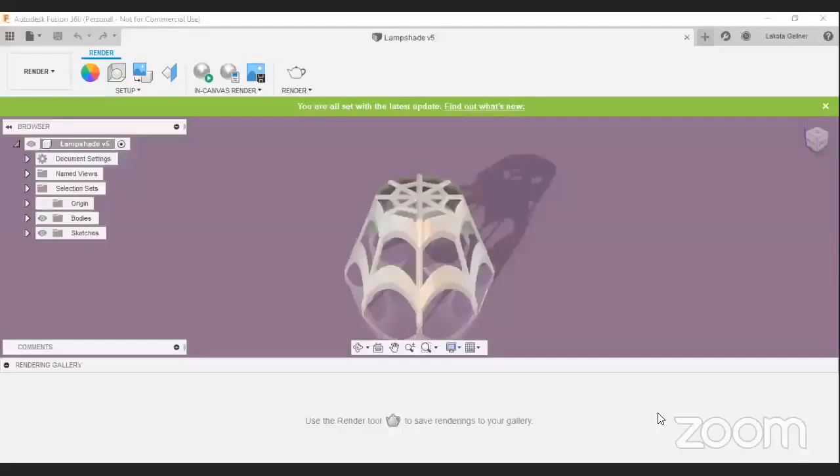Can you see it okay? Yes, yeah, it looks like a crown. Yeah, it is, upside down it does. I tried to make it look a little like a spider web up top. Yeah, I was going to say it looks like a 3D spider web. Cool, cool.

Yeah, at first I was going to have it solid. How big is it physically, or have you actually built it? I have not actually built it, I designed it. So what's the intended size, roughly?

Let's see, I believe it's a foot tall, I think. Okay, I didn't know it's exactly roughly. So roughly it's a foot by foot kind of thing. Yeah, I didn't know how big to make an actual lampshade because I don't have one for reference.

So I am curious about something though. This doesn't look like it would shade the lamp unless maybe you put paper or translucent plastic around the gap in the center. What am I missing here? Yeah, I think you'd have to put paper on, like a shoji screen or something like that.

Yeah, I'll just explain, Eric, I'll mention the challenge. We're not actually necessarily making anything, although with some of the challenges people do make the item. This is just to sort of get people going in Fusion, and then we do our little show and tell, and if someone got stuck, we help them with it. Gotcha, okay, now I understand.

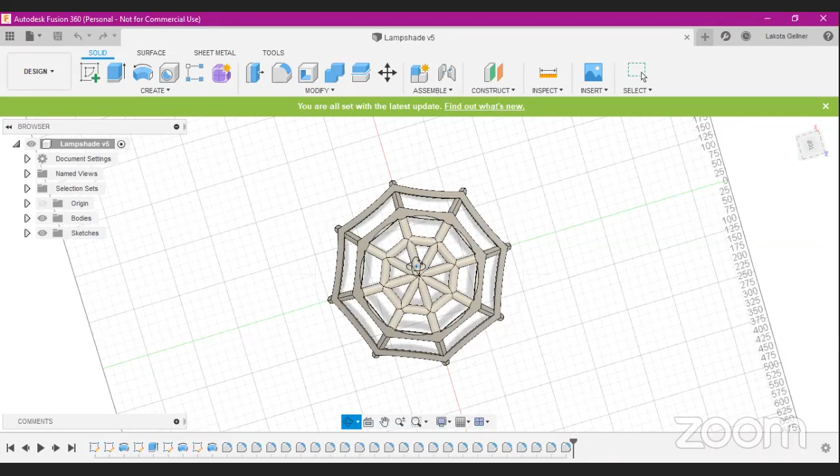You know, the other thing this looks like is the bottom end of the Eiffel Tower. It occurs to me that could be your next Fusion challenge. Cool, that'd be fun.

Okay, it's not exactly the Beautiful Eiffel Tower. I like the shadow that it casts, though.

Thanks, Lakota, I had a question. Those scalloped inner edges, what did you do to create those?

Oh, it was actually very simple. I revised this a few times, so if I were to do this again, I'd do it in a different order. What I did was I created a sketch of a spider web, which is a little tricky to make. I basically extruded it, and then put spheres, and where they intersect, it creates those lines.

I did a revolving cut to it. That's a great solution, actually.

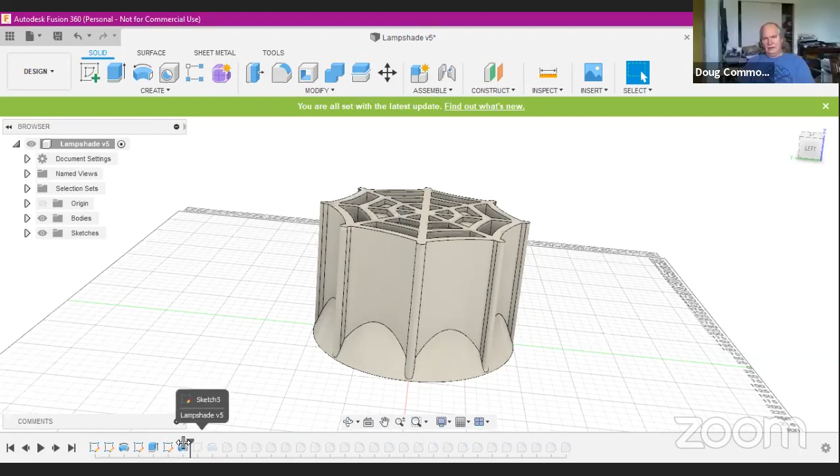So this tool is called Autodesk Fusion. Is this a Fusion 360 free tool, or are we using it in free mode? Yeah, it's free. And is the idea that you can migrate design files from Fusion to a CNC milling machine, or a 3D printer, at the push of a single button?

Is that the design methodology, the tool flow, that you guys are thinking might be suitable for a newbie like me, or is that too complicated? Because there's been a whole debate using Google SketchUp up to this point. I think SketchUp's a good starting point.

But if you're doing 3D printing, you can go straight from Fusion to 3D printing because there's a really good post processor that's almost seamless. But there isn't one for CNC milling, or maybe there is, but it's complex. It has so many bells and whistles, it's just a lot more complex.

It does sound like this is my kind of group. Good call, Darcy. This is exactly what I needed. Kindergarten for idiots. No, that's great.

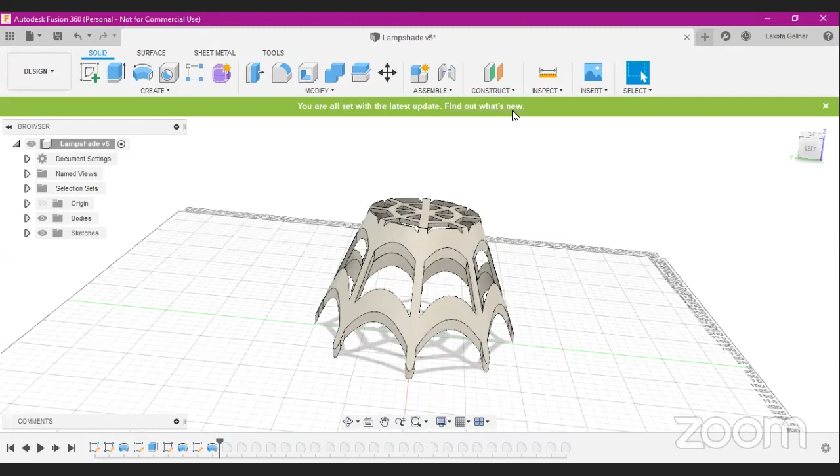So who's next? I think Isabel said she had one too. If she's there, I don't know. No, I didn't have a chance to. Sorry, I didn't mean to put pressure on you. I thought I heard you pipe in. Sorry, my bad. No problem. Way to make people feel welcome, Doug. I know.

Well, Dave, do you have your rocket ship shaped? What's the very top of the rocket, where the emergency escape vehicle, the escape system? That could be your lampshade.

So for that one, when I drew it, I actually did it in FreeCAD, not in Fusion. And it's complex enough to design that I didn't draw it using any of the drawing tools. I wound up writing a Python script that calculated the vertexes and stuff like that, because it's actually a very complex design. I looked at drawing it through manual processes, and it was just going to be horrific amounts of work.

So I wound up writing some Python code to do that. You can do that in Fusion as well - I've not had need to do that particular one in Fusion, but maybe I'll give that a go this week and show you guys how that's done. I've written some macros for Fusion, like one that generates nose cones, which I had in FreeCAD and ported over to Fusion, so that was pretty straightforward.

So isn't the nose cone, from what I've seen, like a revolution - you just draw a Bezier and rotate it? But the Beziers have specific shapes, and that's really where the macro came in. You can have a simple cone, or a spherical, or an ogive - there's a lot of different shapes, optimized for different speeds. There's a reasonable amount of theory, but I didn't have to get into it - I just went to the Wikipedia page and it showed me all the formulas.

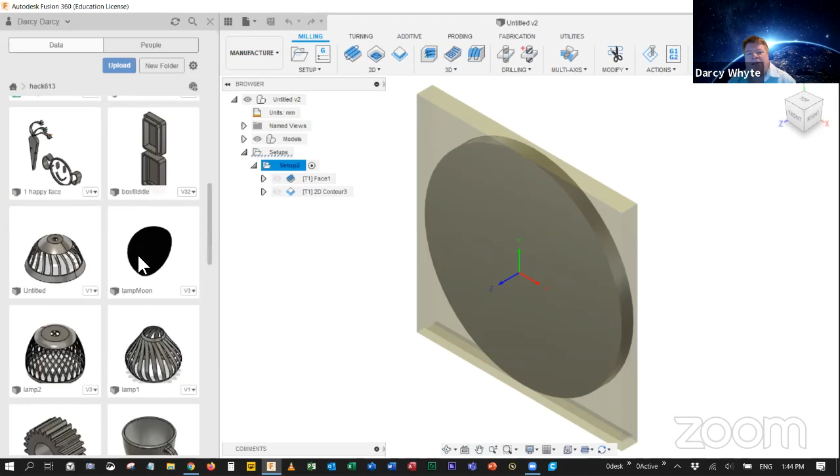And the lampshade is the one in question for today, and I think this is it. My secret project is a moon lampshade. But so here's my lampshade, I guess that's the latest one.

This one looks 3D printable. So I'll just move the history back so you can see the steps here. So I started with that, and I made this by sketching and then just revolving.

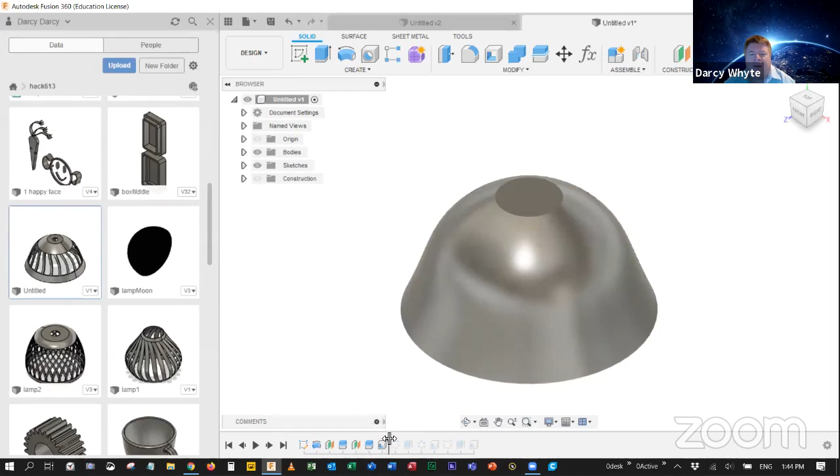And then once I did that, let's see if we can see something that shows up here as I move through. Okay, I shelled it to make it empty. And then I did an extrude, you can see I did this sketch right here.

Or I'll have to double click that sketch. You see, I did a sketch, and this is based on a tutorial I found on YouTube. So I just sketched this on a plane that slices it, and then I'm going to extrude this thing out.

And you can see in the next, if I finish the sketch, when I move to the next point, you can see that I've extruded it like that. And then I did a pattern of that.

Is it called, what's this thing called here? A pattern. And I just rotated that thing around. And then looks like I shelled, then I shelled the top or the bottom here and kept going. And anyway, that's the deal.

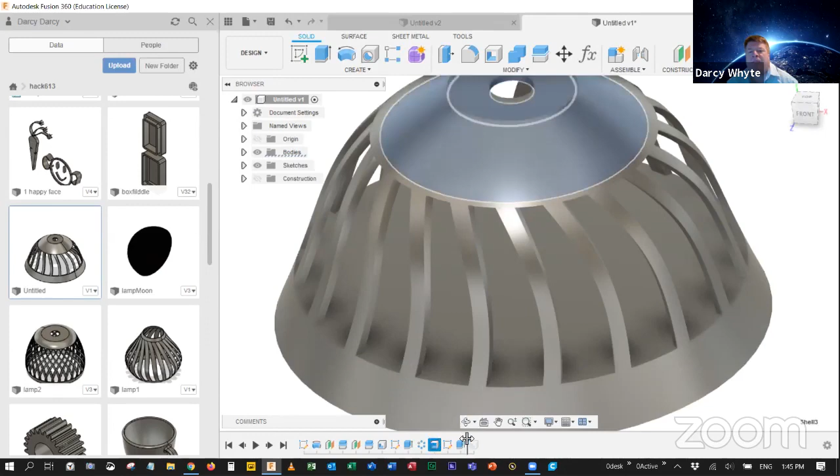So looks like I made a hole at the bottom. Is that an extrude? Looks like I shelled the bottom to get that. So that's how I made mine. I started by revolving to get a circular thing, and then using extrude, I made a pattern. Several YouTube videos demonstrate this technique.

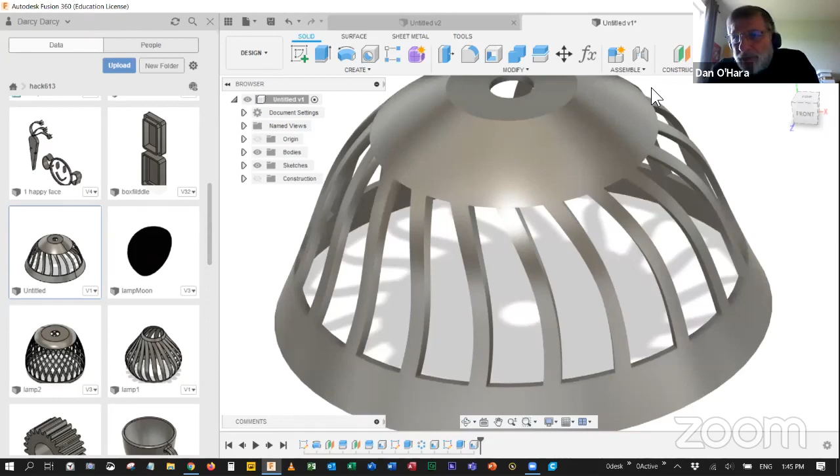So I have a question there, Darcy, I've never used 360, but do you have control over where the light source is in the rendering? I don't know how to do that yet, but no. Yeah, I don't know, you must have control over that.

Well, one of the things is when you start your sketch, like if I did a new sketch here like this, when you start to do your drawing, you usually start with this button over here, and you pick a plane. So even if you couldn't control the light, which I suspect you can, it's just a matter of how you orient the item that you're doing.

Oh, I see. And I made a pattern of just starting here, and I don't know if that's a good idea or not, just because I'm in SketchUp before, and I'm just used to going to school and the teacher draws on the board an X and Y. So I want an X and I start drawing right here, you see? And then maybe you make a circle like that, and then I'll pick solid, extrude, and then I'll just extrude that into an object.

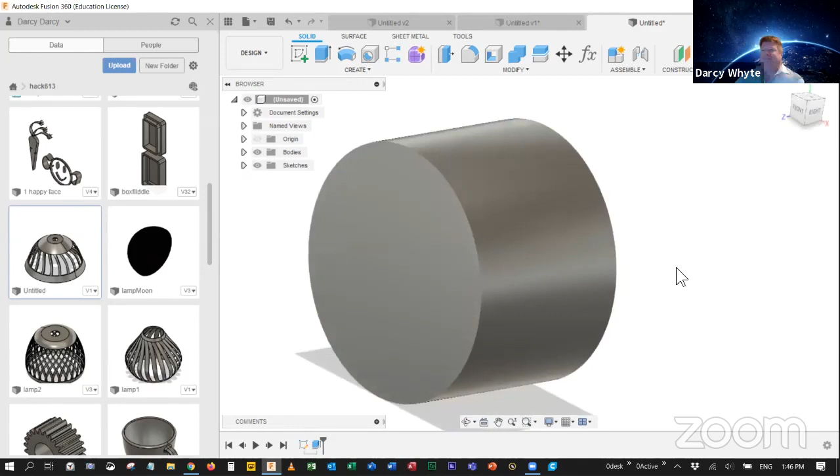And then, so now the light is, you know, so it looks like Z comes out. Yep. And it's the XZ plane is the floor, it looks like to me.

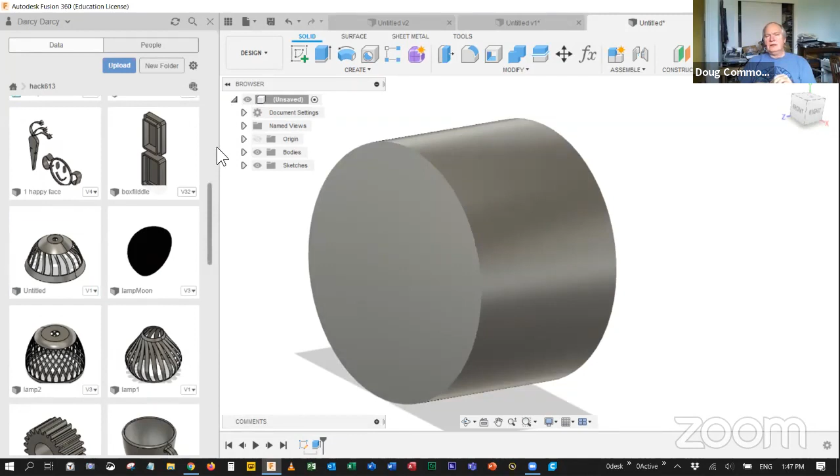I don't know the answer to that. There is a way to do this because I've seen some really cool pictures come out of it, Dan. I think what we're looking at is the CAD part, but there's another tool you can pull up, under design I think - the design button render. I'll be doing that render later. Okay, let Ray have the floor then.

Quick question on Fusion 360 - I was checking on the web and it implies it's cloud-based. Do you actually run it on your machine or is it running in a browser? A bit of both, it's a hybrid. If you're generating forms, it'll be in the cloud, but some of the more rudimentary stuff is on your computer. The really heavy stuff your computer won't handle. You'll be a while before you get to the heavy stuff, presumably. What I'm getting at is, do you download and install an app, or is it all running inside a browser?

Yeah, there's an app. And it seems like it was saving to the cloud. Yes, it saves in the cloud. And there's also a local save, but the local save self-deletes in like 60 or 90 days or something. I noticed you can export, they call it archive, and it saves a local file, but I bet that will be your own problem to manage in your own file system. I don't trust Autodesk as far as I can throw them.

Right, I'm reluctant to invest time learning that tool. Just one of those things. We all had those feelings, but when you get into it, you can make some interesting things we were finding challenging before. So I can take all my files away and I'm still ahead.

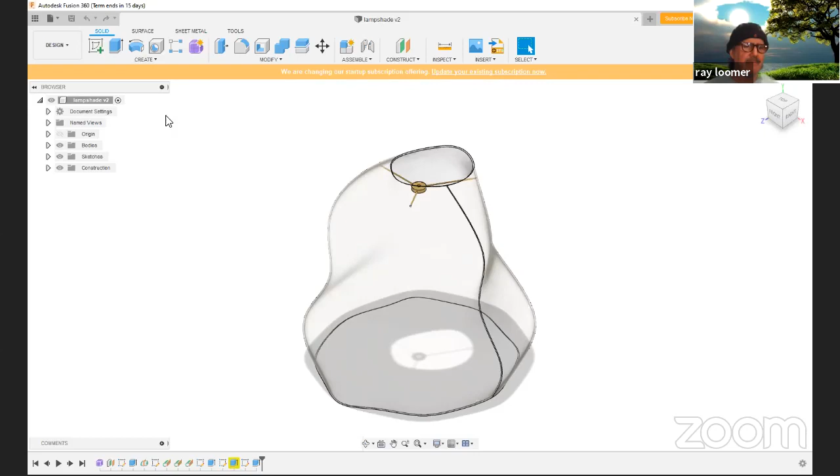Instead of walking you through this, I'm just going to start with a new design and show you what I did. So I used a different mode - I used the form mode. I clicked here and picked cylinder, and I picked a plane.

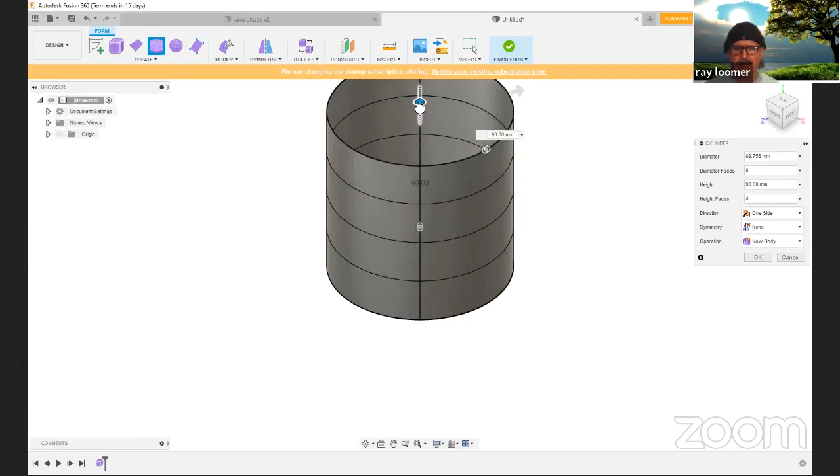So the basic idea of the lampshade is already there. I can adjust this width-wise, I can adjust this height-wise. And if you see this little thing here, I can adjust how many segments it has, which is important. I can adjust the segments this way as well, because every segment, every intersection, and every line is manipulatable.

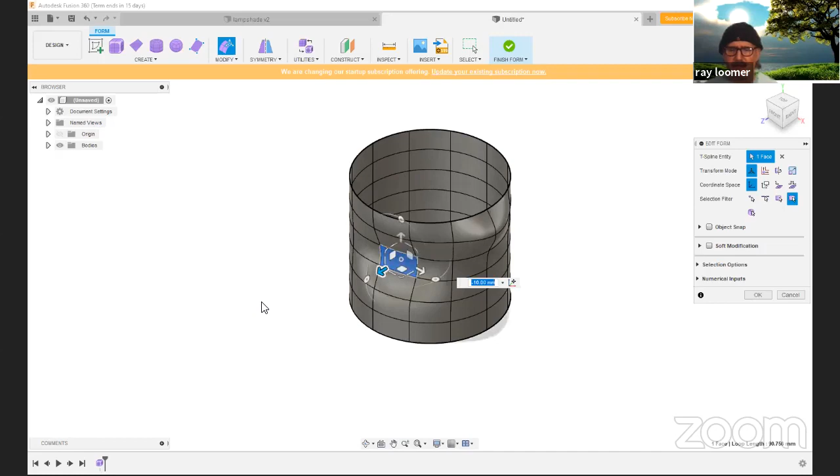So you start tweaking all the intersections to get whatever bizarre shape you want. It splines the rest. Right, so this is actually just right-click, edit form. I pick something and pull on it a little, or I pick a whole face and push on it a little, so I end up with like a blown glass shape, very easy to do. Or I pick a line and pull on it a little.

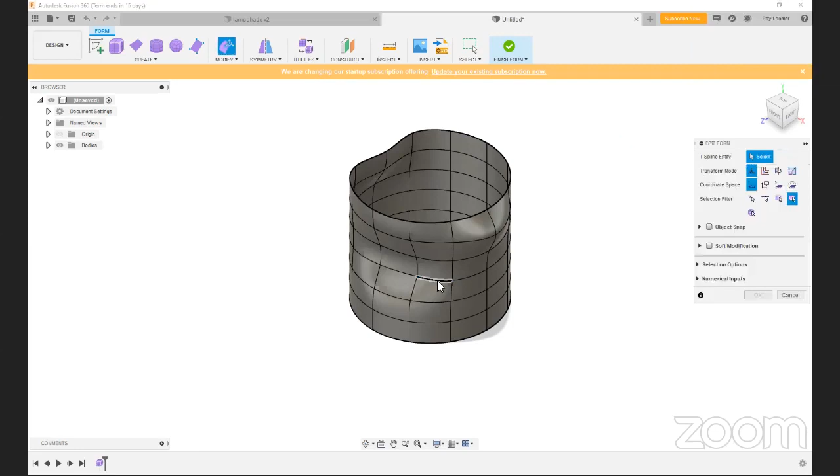There's a lot of modifiers, like crease. If I put crease on this one and then edit the form, this feature should be called 'How to Make Something Brand New Look Dented and Old.' Yeah, this could be a pop can that's been around for a while. But see, when I put the crease modifier on it versus this one, it's quite sharper. So there's a lot of different modifications that I could do.

Then I did the offset plane again, brought it up, and did my sketch here with the three bars and the hole in the middle. If you want me to go through that, I will, but I think that's been covered in some of the other ones. So this is a feature that people don't usually use.

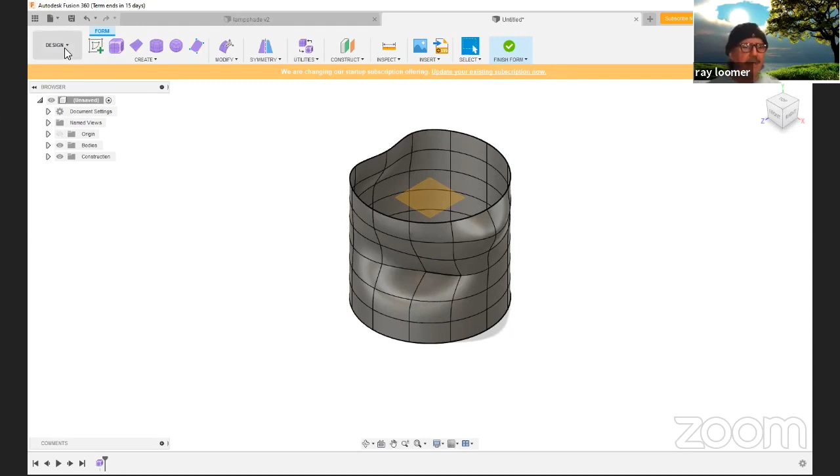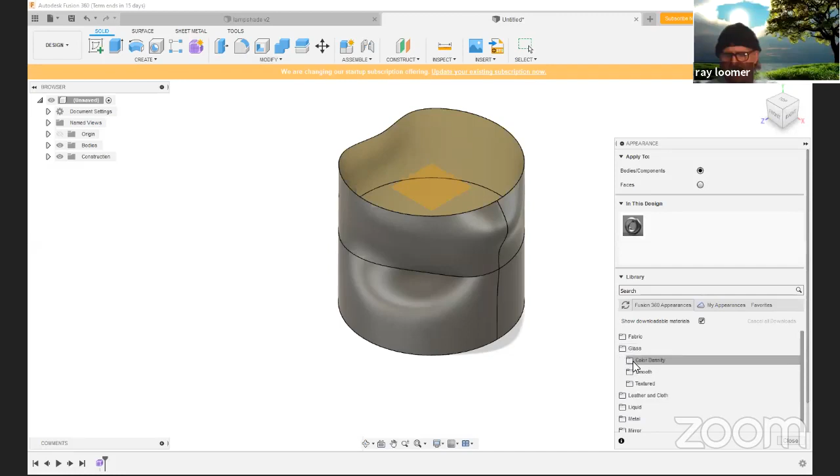And when I go over here to design, I can go to render. Actually, let's go back to design. So I can go into modify and go to appearance. And one of the appearances is glass. For example, I could just give it glass. Use that. So that's presumably supposed to be glass, but anyway, that's better looking glass.

So that's all I did, is I just modified it so it looked like a big blown glass lampshade. Now the interesting part about this, I'm going to start a new design again.

The interesting part about this is if you want a box for something, you could just take like a box. You're making a box for whatever device you have inside. Something's happened. Try that again.

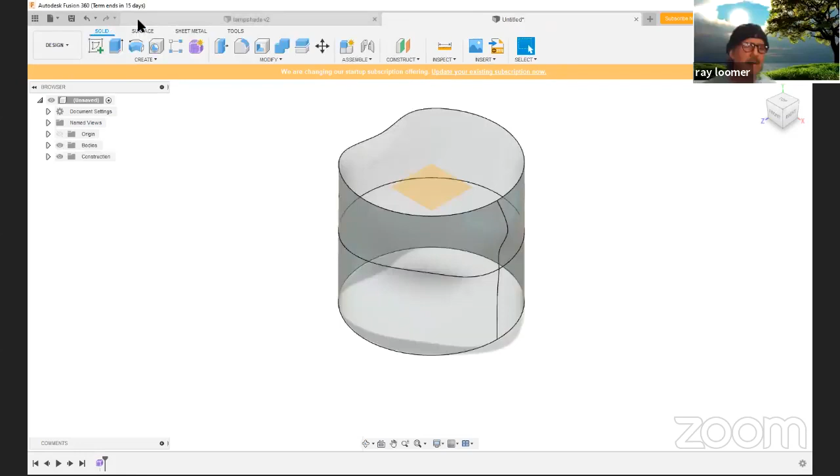Well, gentlemen, I got to go in a minute. It's been very interesting. I will follow with interest your future Zoom meetings. In the meantime, I guess I better download Fusion 360 and give it a whirl. But thank you for sharing a meeting with me. And Darcy, thanks for the invite. See you next time.

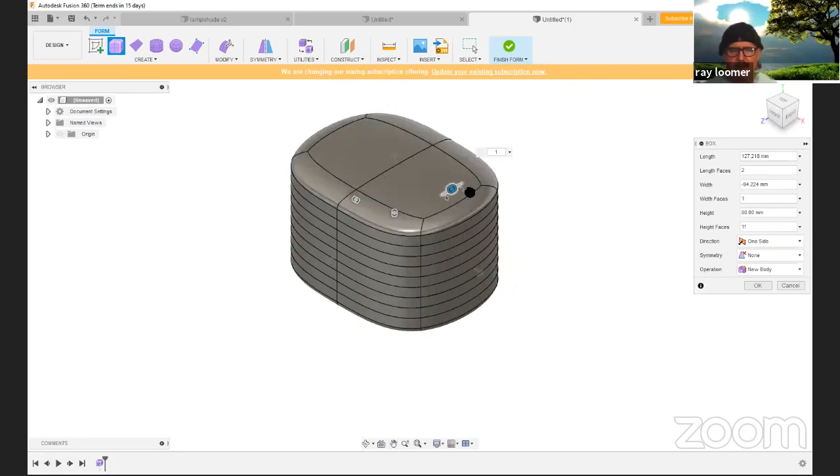See ya. So in form mode, you end up with a blob, like when you pick, but you can make it almost a box by increasing the number of segments. But if you really wanted a box, you'd probably stay in the regular design mode. But you can get organic shapes. If you make something and you want a shape that fits around something, a shell, then this might be the way to go. And again, you can modify this.

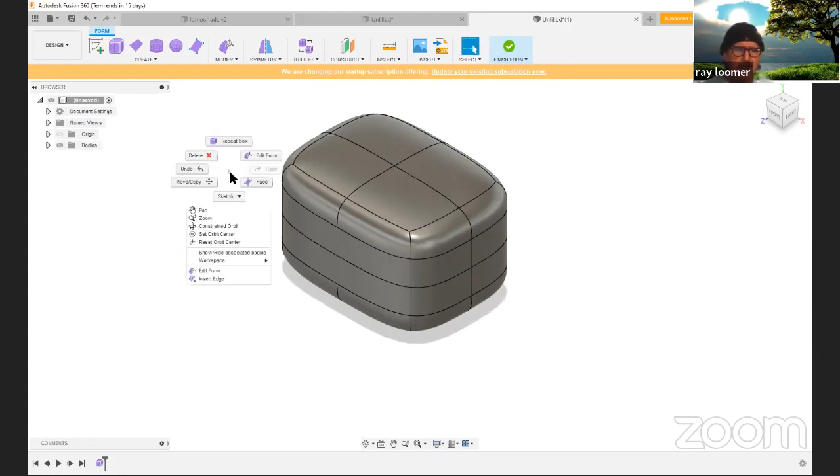Oh, come on. Oh, wow, it's a stick shift. An anvil. Yeah, or an anvil.

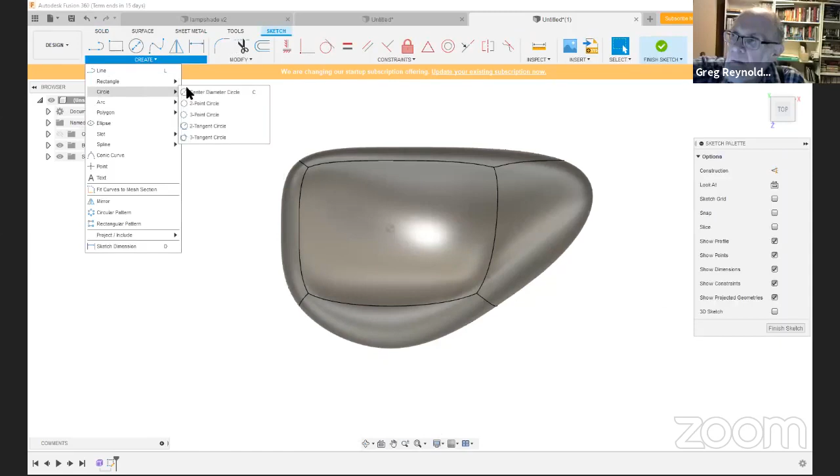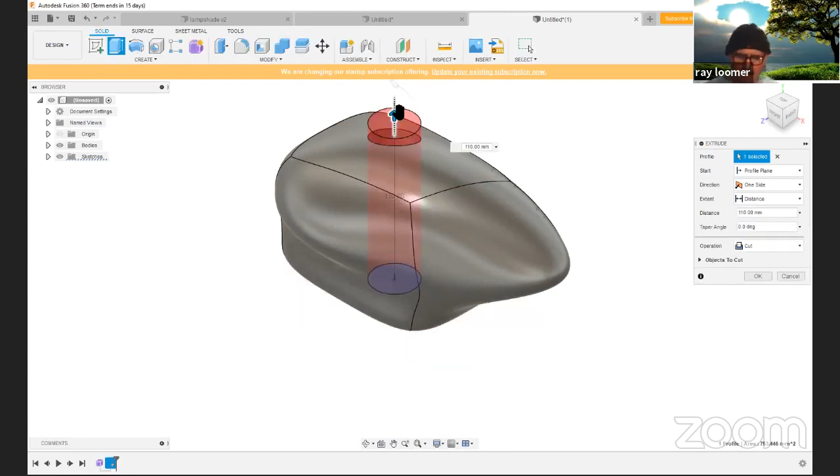But then you can finish form, and what this does is it creates a body and you're back into the design. So you can do your normal stuff, like just create a sketch, say center circle. So now you've got this hole through it. So it's just another body that you've created in a very organic shape.

And so you can create a box, or if you use the shell command—where is that? Here, I'll pick the hole itself. And now it's hollow. So that could be like a box for a piece of electronics or whatever. You could 3D print that and it would fit around. Very slick, it has a great presentation overall.

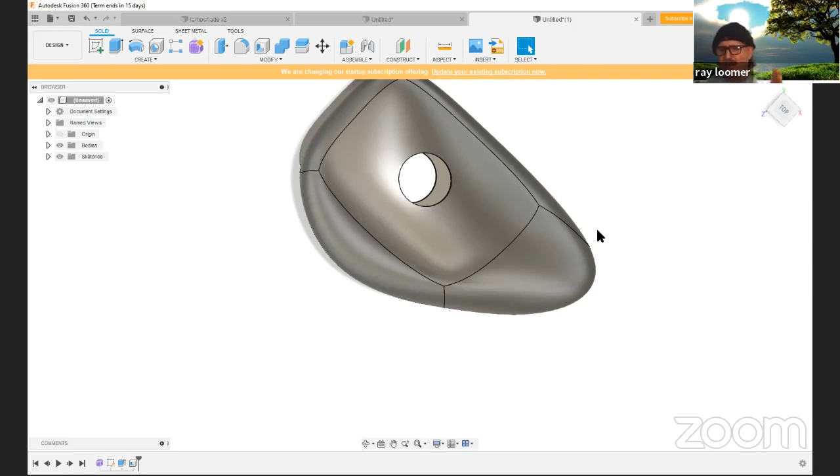You put the holes where you want it for the knobs or whatever, and I think that's printable and you could do it in sections. So that's just, I thought there was an interesting feature to bring forward. Yeah, for sure, awesome.

What about more complicated things, like could you put threads into that hole? Yes.

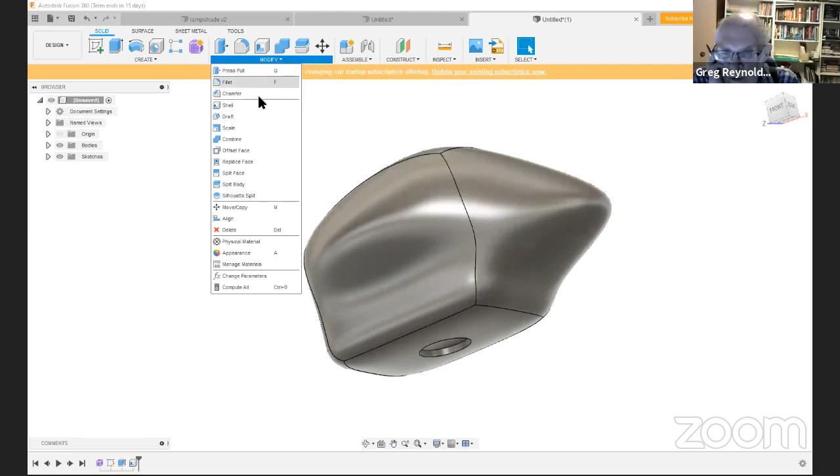Ray, where'd you use specify hole for the thickness of the object? In shell, modify—where is it, here. Oh, up, up, yeah, there, it's the first one. That's why I didn't see it. So I pick, okay, let's... and it's just asking you to type in a number there.

I have to drop off. I will hopefully get back before you guys are done your other discussion, but if not, take care, we'll catch you soon. Yeah, bye. Take care, Ned. Bye-bye.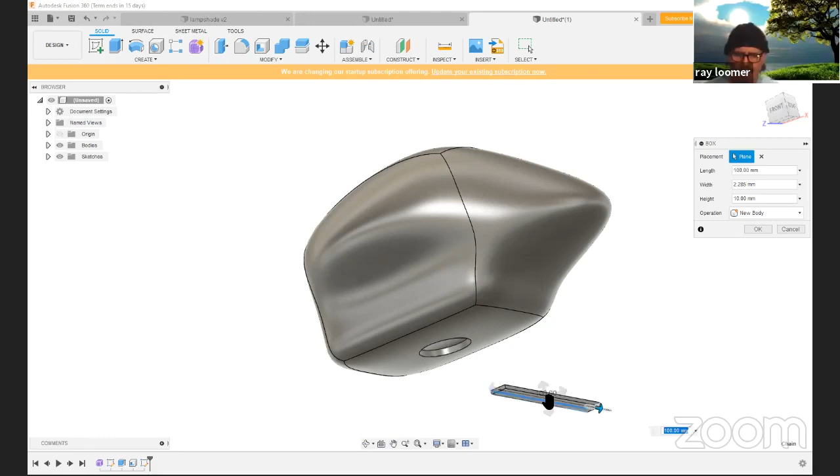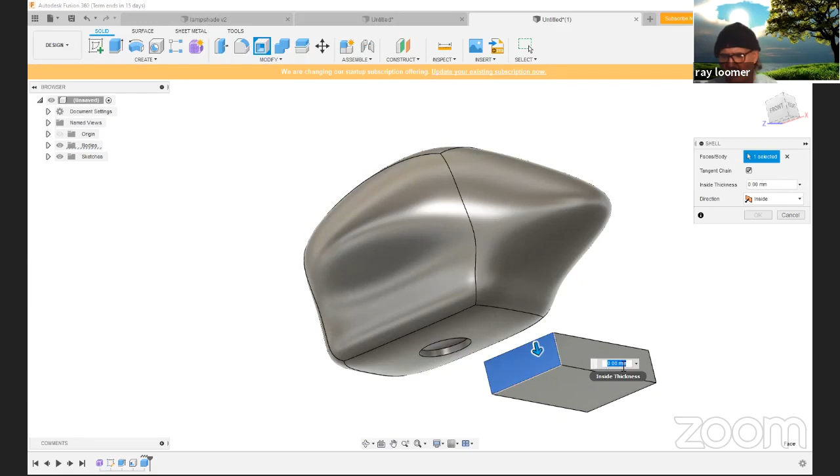Modify shell command off of this end. See, as soon as I click on the surface, I have that little dialogue. So if I hit 2, it'd be 2 millimeters. If I hit 5, it would be 5 millimeters. Really quick. And I can pick more than one surface, so you can have multiple holes going in. It's a slick little trick.

And someone asked about threads. There is a thread thing. Also, when you do hole, you can do thread too. Oh yeah, there it is, thread. So you click on thread, you click on the edge.

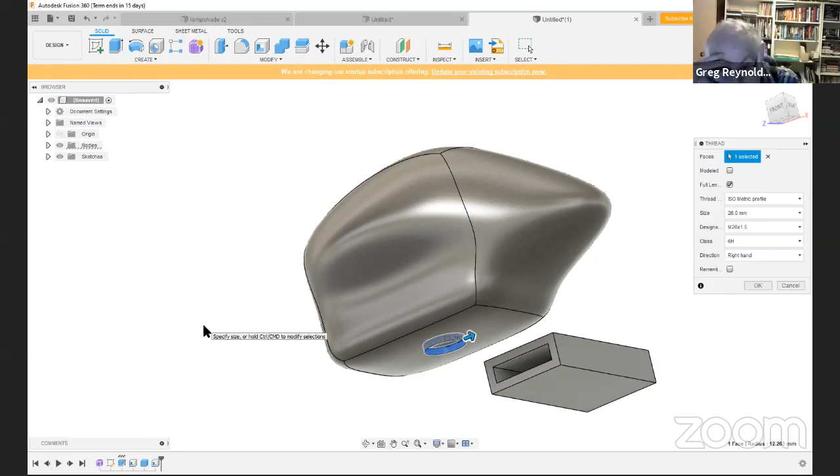And would those threads be 3D printable? There's two different ways to do it. You can just have a decal on it showing a thread, which is good for some applications, or you can actually have the 3D printable thread, the actual thread in the design. There are some good YouTube videos out there for creating 3D printed threaded parts.

I was thinking that if you dimensioned it correctly, you could maybe clean it up with a real tap afterwards to get better quality threads without having to remove so much material. Threads like that, you're probably going to be disappointed because 3D printers don't have the resolution. In that case, it's really up to you, you're just going to cut a hole and then use an actual tap. At least it would be close, and you wouldn't have to be removing so much material, or if it's in a difficult place, maybe be able to tap it.

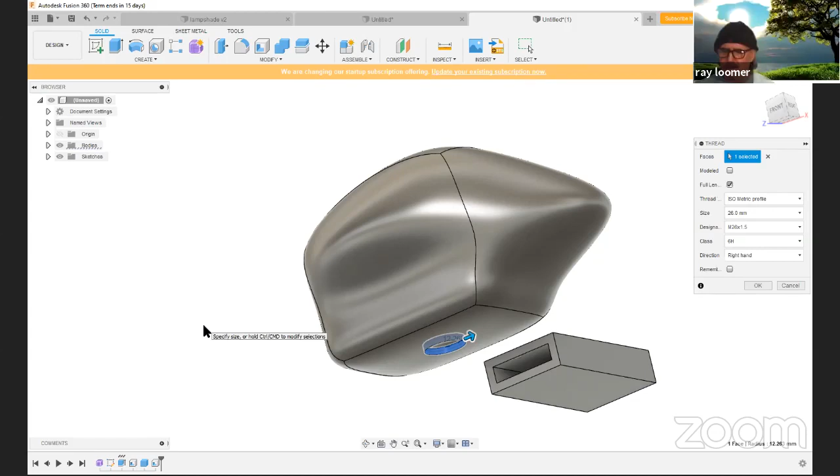Another common thing for threads with 3D printing is you can get brass inserts, and you use a soldering iron to put them in because it heats the plastic just enough. That gives you a brass piece that's going to hold your thread, so it's level. And I guess they're reinforced on the outer edge so it has a good physical grip to the plastic. I use that on my rockets all the time because I have electronic sleds that hold the electronics to control the rocket, and for those I use the brass inserts because I don't want those things flying around.

It's surprising though. But the 3D printed threads, they work better than I would have thought. It depends on your application. I got some right here. See, I made this thing just yesterday, and you can unscrew this piece, you see. So it's really sloppy, but for this application, it's fine.

But yeah, you can print out the threads for any standard thread, or you can make your own very custom thread using the spiral tool, using it as a cut and putting in whatever angles, and then you can make a proprietary thread that's going to annoy everybody, but you can have it. The machine is capable of doing that. There's some good YouTube videos on how to make the crazy proprietary ones, or just import stuff from McMaster and pop it in.

That's very cool. If you're interested in seeing quickly another example that uses the same tool Ray was showing, I can show you, since it seems to be something new. It's not a lamp, but it's something very similar. If you're really interested in learning how to use the Create tool, there's a YouTube video on how to make a Pikachu. I thought that covered a lot of things, and then you end up with your very own Pikachu. That's the one I would recommend. Thanks, Ray.

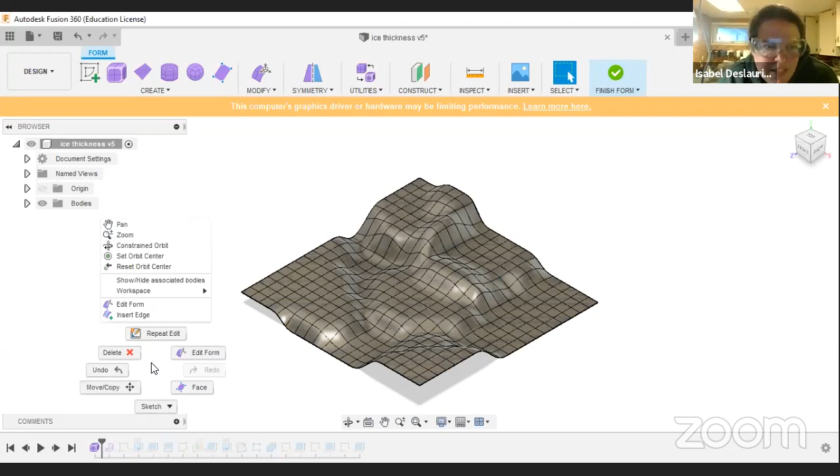So it's the same tool that was just shown. I started with a grid like that, and then I pulled up some parts to make different thicknesses. I made this a while ago, so I won't remember all the detail necessarily. Then I did another one.

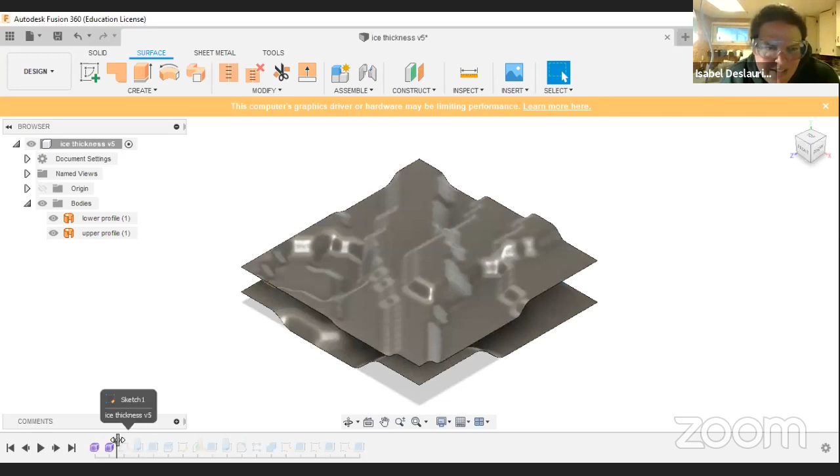Whoops, spoiler alert. Yeah, so I made another one on top. So I'll visualize it like that, so that then when you had like... let me show after, then a couple extrudes after.

You can see the bottom was supposed to be like I printed out blue for the water, and then the top part was white, so the kids couldn't guess. Like here it looks very thick, but maybe the blue part is very thick and the white part isn't as thick. Then I started to work with more of the standard tools that we know.

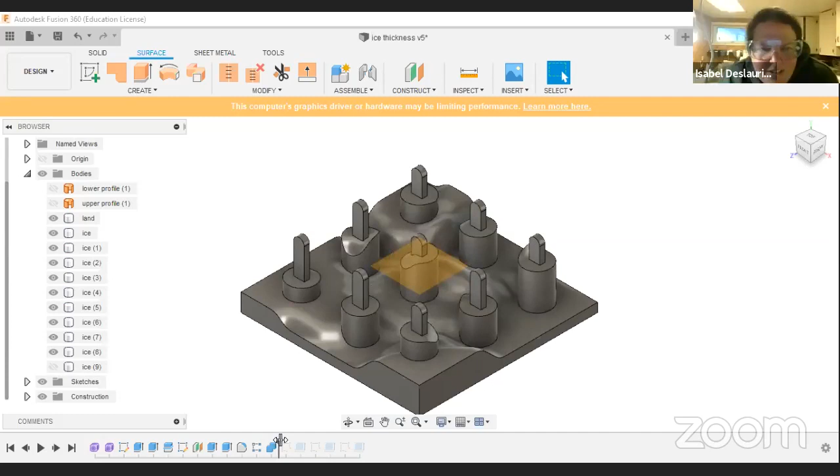So I made little pegs sticking out and a cylinder that cut into it. I ended up with these - let me turn off a few bodies here. You can see I had these little bodies. I kind of forgot what I named each one, but you get the idea, and I numbered them. Let me turn everything back on.

So at the end you ended up with these 9 little cylinders that you could pull out, and you could see the different layers inside of different colors. They were supposed to find the safest path across the ice based on those cylinders that they pulled out. But for me, that was really the project where I learned a bit about that different environment that Ray was showing, because you needed that organic shape.

So, and you actually printed these? Yeah, hundreds. How long did that take? Because you're using different colors too, right? Yeah, so there's 2 offices that work for the same organization that also have a 3D printer. Usually I design it and then we distribute it across the offices, and different people print different parts. It must have taken like, I'd say 3 weeks.

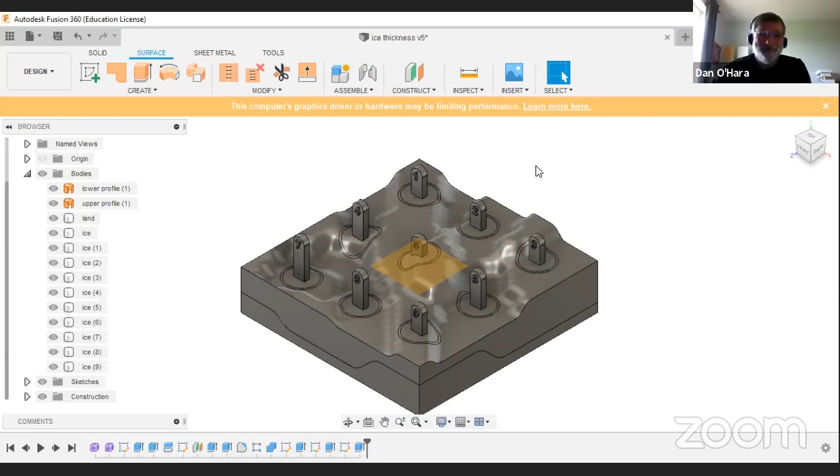But you know, it's really nice for some of the kids that we do in schools - the original idea that was proposed by the group we were working with was to do this with a bowl with water in it, and then you put shaving cream on top, and then you take a sample. It sounds like a good idea, but just thinking about the practicality of it, we could see how much of a mess it's going to be. So it's really nice - with 3D printing we've been able to do a lot of custom educational stuff like that.

Anyways, that was just another quick example to show the relevance of the tool that was just shown. Very nice, oh that's awesome.

Isabel, what grade was this for? We did it for grade 10 to 12. Oh okay, high school, wow. But in general it's from preschool to end of high school, so it just depends on the topic.

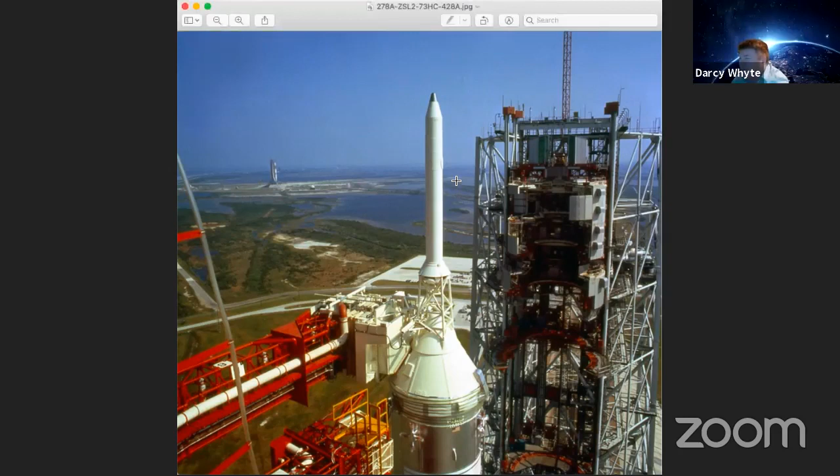Boy, the forces on that must be just incredible. Yeah, there must be a lot of vibration coming off of that. Well, that's the thing - you do have to handle all the vibration and things like that. So like I said, it's a very simple design, but it's just so beautifully designed.

It's kind of like the complexity of a bridge truss system where you've got lots of forces that shift over. But at the same time, this is moving and rotating in multiple axes at the same time, which bridges don't have to deal with. Most of the stress is going straight down, but there's obviously at least some minor torsional forces. You can see we have the triangular struts here, but this ring structure, I mean, that's just...

Well, when it moves to the side, is there not aerodynamic loading that comes at not a perfectly straight up and down angle? If it's moving to the side, are you not getting some lateral forces? You'll probably get some lateral forces, but remember, even when it's moving to the side, it's pointing to the side, so it's still pointing along the direction of travel. Oh, I see. Yeah.

That's a lot of pressure on that. So it actually isn't going fast at maximum aerodynamic pressure, it's only like Mach 2 or below. What you'll find is a lot of the rockets throttle down until they get through that transition, and they call it max Q. So if you watch SpaceX flights, they mention that point. At that point, they put the motors up to full power again and start thrusting through the thinner air. But they're already over Mach 1, so there must be a shock wave there.

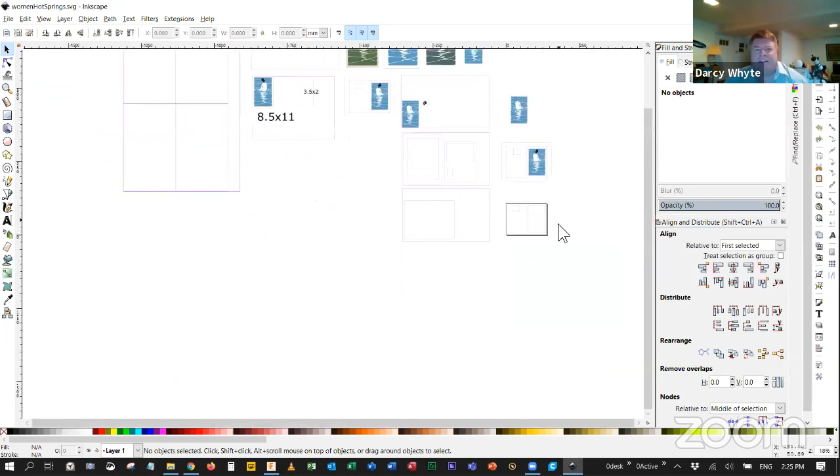So this is a nice, good sized desktop machine called a 6040, and that whole box I just selected is a 6040 size machine. I've got one of those machines, and I'll show that in a minute. Actually, no, I'll show it right now. This is a 6040 right here.

See that thing there in my other camera. There's one more size after this that you can fit on your desktop, called a 6090, and of course that's almost a meter of cutting area.

Now here's where the rub comes in - a good 6090 is about $5,000. You can get a low end one for say $3,000 or something like that, and no one wants to play with that money, and it takes up your whole space, it's a massive machine. You can't pick it up by yourself. Even this 6040 I have, I wouldn't pick it up myself, I wouldn't even try. I did that before a few years ago, and I'm still paying for that.

So anyway, that's a 6040. I feel they're a good buy - that 6040 I just showed, I only paid like $1,000 for that thing. Maybe it was $1,200 with the conversion, taxes and shipping, something like $1,200 or $1,300. That's a pretty strong value proposition. If you've got space and you're sure you want it, that's pretty cool.

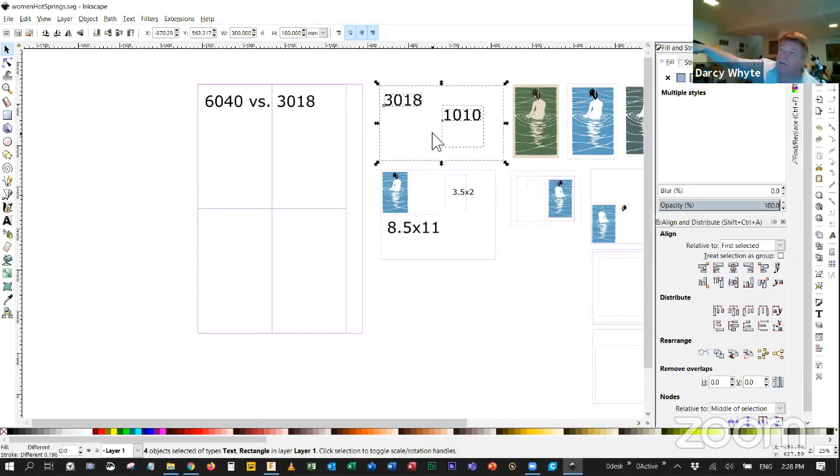I can carry 2 of them just in one hand by putting them together, grabbing the 2 beams and walking around with it, no problem. By the time you get to a 6040, you need 2 people minimum, and a 6090, you need 3 people to lift it, because you're really working when you're lifting these things. So this size is just such a nice size that it becomes portable.

Other common sizes - 3020 is another size, and oddly those machines are usually made very heavy. I had one that weighed about 60 pounds. I don't know what my 3018 weighs, but it sure doesn't weigh that much. And it's plenty rigid - I think you could do aluminum on this thing, plenty hardwood or anything like that, as long as you're not too greedy about how fast you want to get things done.

Another common size is 3040. They're also a good buy. I think the 6040 and the 3040 are two - the 3040 is about the biggest you can lift up by yourself. See, that's just designed for one person to carry. So anyway, that's sort of the size we're talking about, and that's a limitation of this machine. At 3018, you're going to be limited to what you can get into that machine and cut.

And that's just one of the trade-offs. So if you want to go bigger, the weight and the price just goes up with the cube of the size, basically. And what's an example of some of what you'd need for those sizes?

On the 3018, could you not just take your project and build it as smaller parts that end up - just make it in parts. Yeah, so where would you have to have a 6040 in order to be able to do it, where you couldn't do that? I mean, what are you missing out on by only having a 3018?

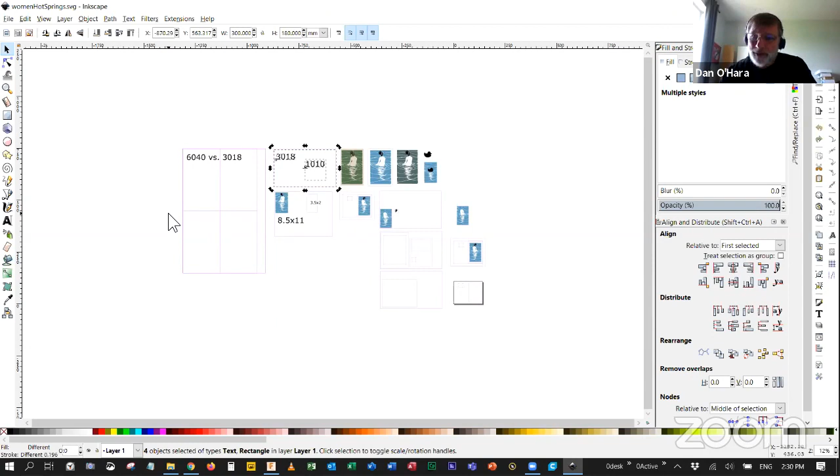You can make a big part in one shot with the 6040. Even when you're making smaller parts, just having the big bed to work on sometimes can be really handy too. I even use it to put tools on - I mean, I shouldn't, but so yeah, that's really it. It's a lifestyle. Here's another one though.

When you buy the material, like I just made an order at KJP, and I got these lovely boards, and they come in, and I was able to order them 12 inches wide or 16 - I got some 12s and some 16 inches. They just fit right on the 6040. So I can take the material right in from KJP, and it goes right on the machine, and then I just keep cutting until that piece is done. It might take me a week to work through a piece, just making whatever parts that I need.

Now on the smaller machine, you're going to have to get yourself a jigsaw to get the pieces broken down to put on it, and all that. So I just did a fun...

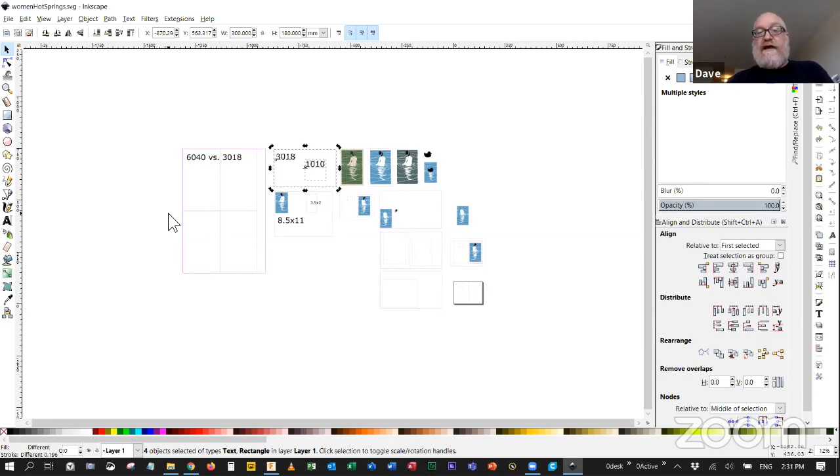Actually Darcy, before you go on, I want to follow this thought through a little. For example, when I was building my Saturn 1B, I had centering rings that were about 30 centimeters across. So with the 3018, I'd have to do half of it, turn it around, and then mill the other half. How easy is it to get it lined up correctly, or is that up to you on what kind of fixturing and precautions, measures, and techniques and tactics?

That would come from practice. If you're really serious, I think the 3018 is a good deal, and it's almost like a no-brainer. Anyone can get into this game.

Let's take the worst outcome. You buy yourself a 3018, you pay $200 to $300 or whatever, and then, oh my God, I don't like CNC. You put the thing on the market in our community, you probably get most of your money back for it. So you're not really exposing yourself, especially if you have it assembled already. Yeah, it's like, hey, I'll take it.

So I think that at this rate, not to judge people's own economics, but at these price points, when you're talking like just a couple hundred to $300 to get a whole kit together, I think that you're not exposing yourself to too much risk. It's not like going out and buying a 6090, a nice one - you can buy a nice 6090 for like 10 grand.

You can get yourself a beautiful one, but you're really getting into some heavy change there and space requirements. Whereas this 3040, looking at the prices, you're looking at around 600 for those. Exactly, and those are heavier built machines too.

I noticed for each size there's a general way they're usually constructed. Mostly, there are exceptions, but it seems like the 3018 and down are made out of this extruded aluminum stuff we're seeing here. Above that threshold, as soon as you get to 3020, they start making them out of much beefier materials. It's probably to do with the geometry, how much flex is usually allowed, and the price points of all the different sizes of materials.

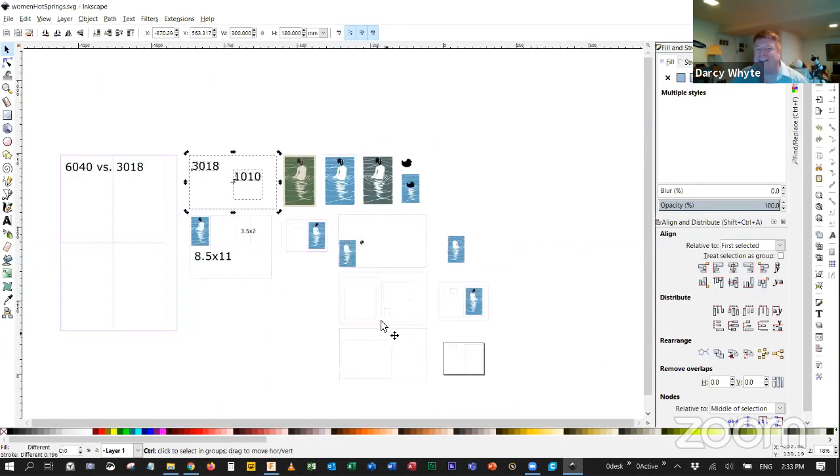I just made this project, which I found really inspiring, to make this lovely thank you card. I even made the fixture you can see that helps me align the prints, because I'm printing the blue area, and then I print the hair as a separate piece. Here's my jig for doing that right here. And I actually made it, and here it is.

This is just a printmaking project. Not everybody will like printmaking, but I know a couple of us are a bit interested in it. So I made this frame. You can tell I had a problem when I was cutting it, but at least I got the center part right before it screwed up on the outside, and I don't care.

So you put your card stock in here to make your little nice thank you card, and then you put the frame on it like this, okay? Now when you ink up this block, which I carved, and put that on there, you can either jump around on it for a while or put it to a press or whatever you like, and you take it off. Then to get the hair in place, you just flip this over like this. See, and it fits this perfectly. There's no gaps or anything.

It's a very satisfying thing. You ink up the hair and you stick it in the hole. And then it's so small, you just press with your finger and you get enough force to transfer the ink. Basically, this whole thing, I was able to make it on a 3018, no problem.

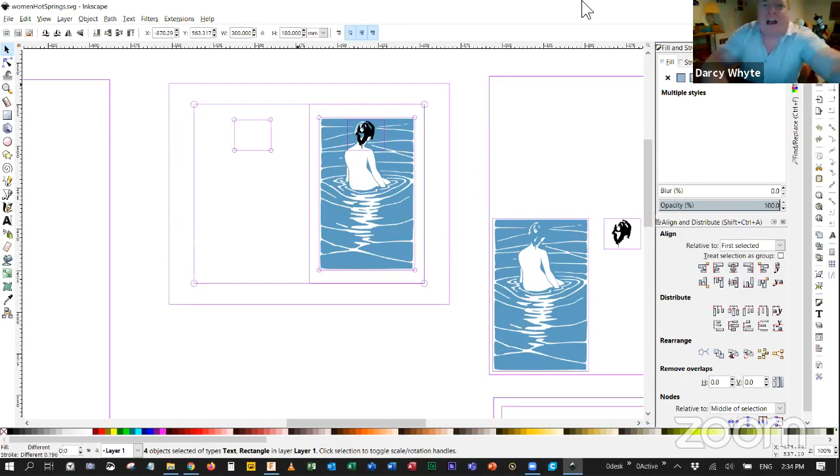So if you wanted something bigger than this, well, you could just see how it fits up on the screen here. Yeah, if you look, you see there's your 3018 and here's my project right here. So, you know, if the project was much bigger, it would be rather inconvenient.

Might go to a bigger machine. Like if you wanted to make a big print, even though I could make a 30 by 18 print, if I want to make the fixture, I got to make it in parts, and that'll just be another hour of thinking about how to do it. So it's like a lifestyle choice.

Now, my angle is, if you're serious and you're gonna have fun with some CNC, I have a bunch of CNCs, so you can have one machine busy and go on the next one. I've got these little 3018s, they're portable. I can bring them to meetups, and next summer I'll be bringing them to the park, we'll be doing picnics. I literally have a Honda generator.

You can actually see it on my screen down there, I think, that red thing down there. Oh no, that's garbage. Yeah, but just a little further over, there's a Honda generator.

Anyway, so that's sort of part of my thinking here of why I think this is a particularly good opportunity to get a CNC machine. Because even if it's too small in the long haul, well, by the time you use this thing for a while, you'll know what you want more. You'll be making stuff and you figure out, do I really need something bigger? Do I not? Do I need a heavier machine for doing aluminum? You'll be able to answer those questions and you'll know what you need.

And in the end game, I love having a 3018, even though I've got all kinds of other heavier, stronger machines. It's just, to me, I see it as low risk.

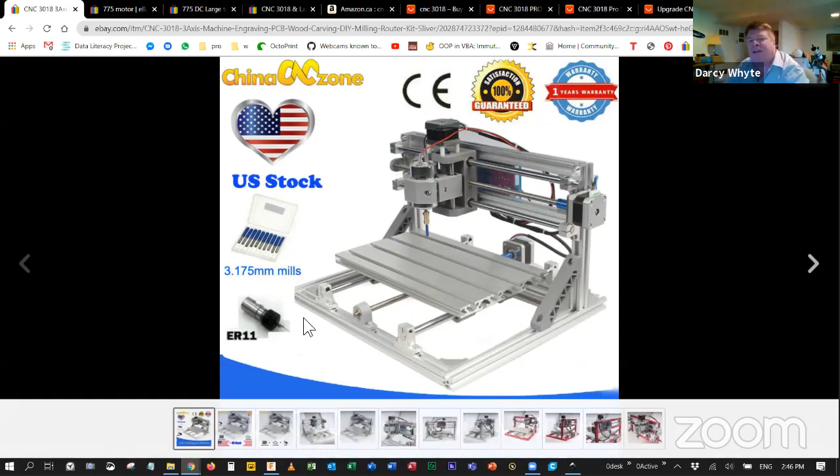So even buying, see, okay, here they're showing it off the side. I bought a machine once that showed like this, but this thing came installed, so I was good. I bought two of these machines, that's how much I like them. But yeah, so that's about it. They're really easy to put together, like two to three hours if you're really on it.

So what I'm thinking is, if everyone wants to buy this or a smaller one or whatever, I'm not talking about a group buy where one person puts out a whole bunch of money and becomes like a secretary trying to gather it from everybody. I mean that we'll all kind of help each other, and we'll say these are the types of machines I'm thinking are a good buy, and this is what I'm advocating for because it's low barrier to entry. And what I'm going to do is host some build parties, so a bunch of people get these, we hang out, drink some beer, put the parts together, and then have some parties to get them running.

And I've already got a workshop planned on how to carve up these fancy blocks for printing. That's a fun application, and hopefully Ray or Doug will have something to share. So anybody who goes along with this is going to be up and running with a CNC pretty fast without putting out too much money, and low risk. Because, let's say you end up hating CNC, you post it in our group and somebody probably will pick it up. I'm not guaranteeing that, but for what you're getting here, the amazing stuff you can get done, I just think it's a good angle to go on.

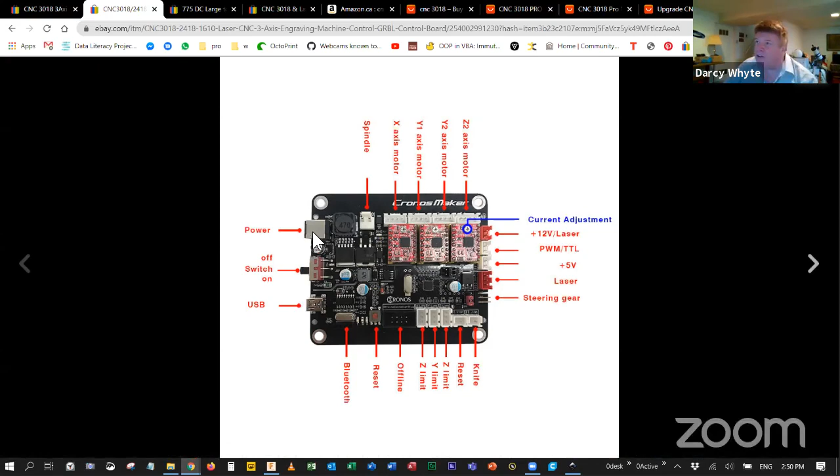So almost all these boards, it's the same story. You plug your computer to the USB, you put power here to get the spindle and the steppers going. Mine doesn't have a switch, for example. Neither of mine do. So each year they'll make a new one. Then you just plug your spindle in here and go get busy. And if you come with a laser, then you'll unplug your spindle and plug your laser in instead.

Put your safety goggles on. I'm afraid of those lasers. I've got one, but I've never used it. I'm too afraid of it.

And you just do your business from there. And there's all these extra pins that if you want them, like if you want to do a probe, go around probing the surface to see if it's level, and then adjusting your G code to follow the contours, like for a circuit board.

I've used the probing on these machines. It does work beautifully. And if you want to have XYZ limit switches so the machine can self-home, they don't usually come with that. You could, but all the pinout is there for that.

So that's your architecture. And another beautiful thing why I personally like these as a portable, fun machine is they run off of a laptop brick. So if I close this, I don't know if you're going to see that in here.

So the whole machine is everything you're looking at right there. And all there is to tether off of this thing is one line that runs from the USB to your computer, and another line that runs to just a brick you plug in the wall, like a laptop type brick. The whole thing, you can walk down the street with it. It's a lovely portable kit.

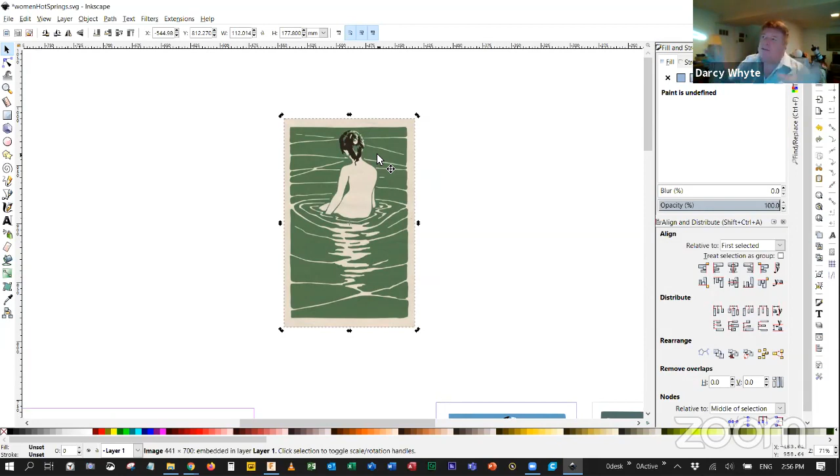Here's what I would do to make that actual thing. I'm here in Inkscape, and I found this on the internet — a very famous piece of print work done by a Japanese printmaker, around 1905 or so. That's a JPEG that I found. In Inkscape, I could go path, trace bitmap, preview, and there's my first plate already ready to go. It converts the JPEG into a vector — this is something Inkscape can do. I'll say OK, and as you can see, when I exit here, that is a vector image now that I can work with.

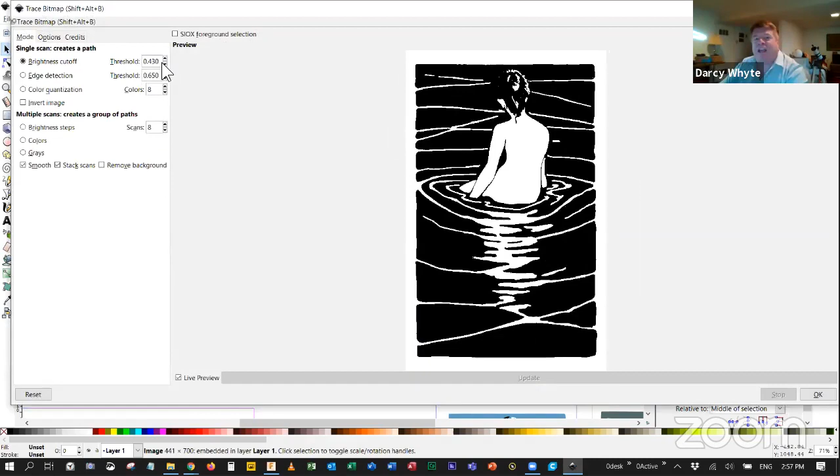Now I'm going to trace it again — path, trace the bitmap — and change the sensitivity so I'm only seeing the hair. Then I'll ask for removal of specks smaller than that, say OK, and close it. There's the hair, so I pick this one and choose a lovely shade for that — let's go with this blue. That's no good, maybe tune it up like that. Now I can put down one ink stamp and then another ink stamp — better move it up the page. Now I just slap that on there to make sure it's roughly lined up, and there's your print, you see?

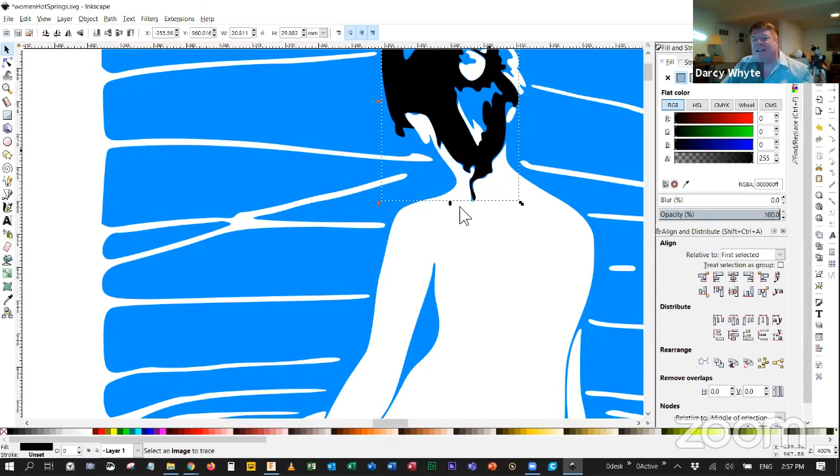So this is the first design phase that I happen to have done in Inkscape. Then to make it work a little nicer, I'll make a square, take the fill, and put a stroke on that. Inkscape's another thing to learn, but I can do this to make a fence — this could become the outside cut where I'm going to cut the block out, so this becomes my printing block. Then I would save this file and go from here.

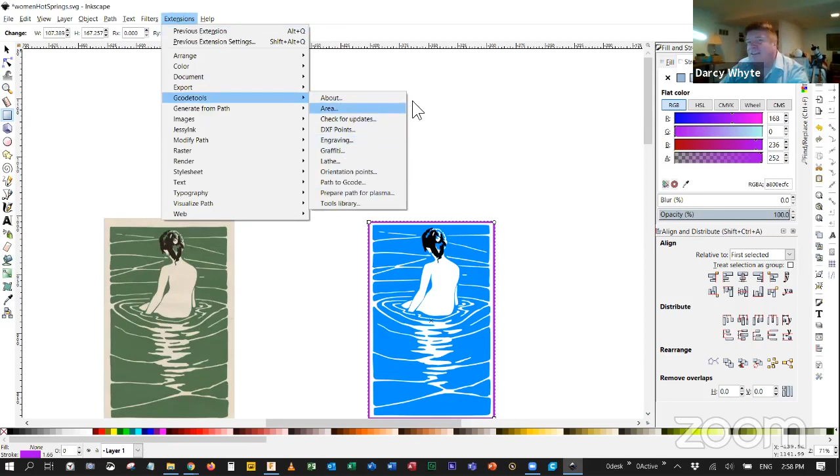Now some people would make their G code right in here. These machines run G code — almost all CNC machines run this stuff. So I have to convert this to a CNC format. Some people, and I don't do this, will go to extensions and use Gcodetools to sort out all this stuff. This will create the text file that you load directly onto your CNC machine.

But I'm using a third-party product called VCarve Pro — that's just what I'm using myself. You would open the file in here. Actually, why don't I open a file — let's say I want to cut this piece out that I have. Where is it here? There. Let's say this is my final work, and I want to make this plate.

Well, just to make my life a little bit simpler, I'm going to do the document properties here. This lets me make the document be the size of that item right here. So there's a button here. Now I don't know where that other circle came from. Oh, I got to go.

I want to be on this arrow, then select, get that off of there. I want to select this and then say resize. You see what's happening? This is my whole document now.

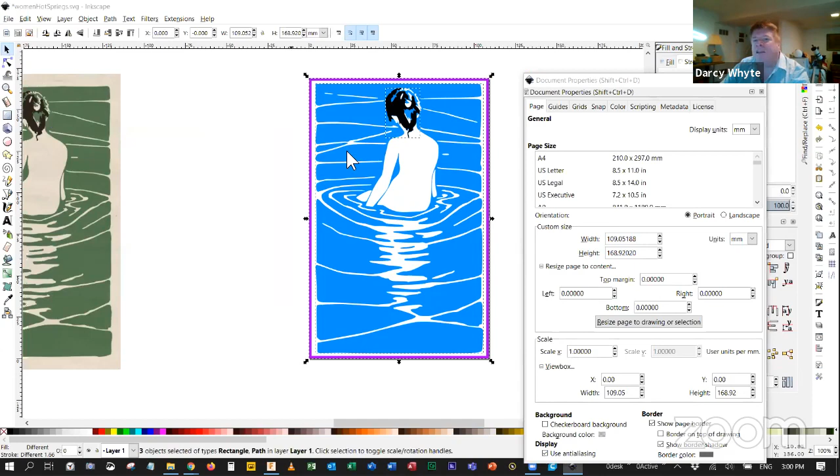And then I'll go file, save as copy, and maybe I'll push it out, and I'll put it on my desktop. You can put it as a PDF or just leave it as an SVG and it'll probably be okay. So just leave it on the desktop. Now I'll close that guy. And I just created a new file on my desktop, as you can see.

I just focused on just the, oh, yeah, I forgot to delete everything else. But in any case, the outline of my document is right around here. And the next stage of the process will know that.

So I'm going to take this file that I just made in Inkscape right here and bring it over to my VCarve Pro. This is a personal thing, everyone will have their own G-code method. Fusion can do this as well, and I just haven't done this exact job in Fusion before. That's up next for me to figure out, how I can do this particular job in Fusion. I saw a YouTube video the other day, but I haven't tried it yet.

So in here, there's lots of options. Like this little option right here says, when I start the job on the machine, the little pointy thing that's going to cut will be at the lower left of my workpiece. So I'm selecting where my 0,0 is in my eventual work. And I'll say okay. Now there's the work, you can see it's white.

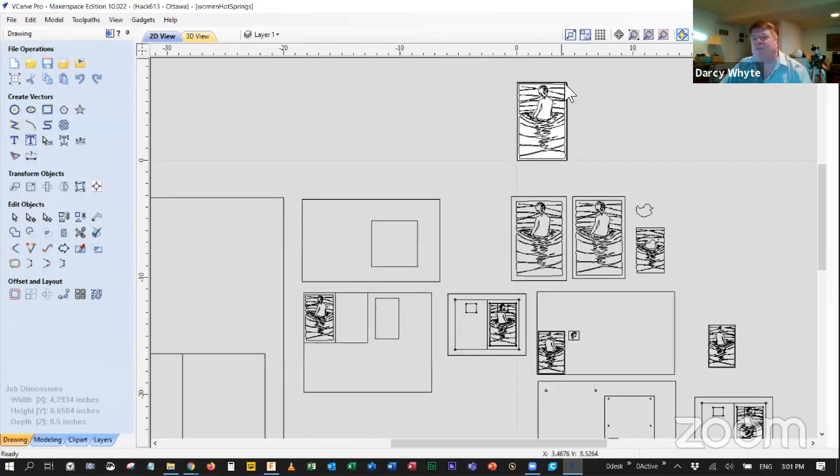Now in this software, the left side is the CAD side and the right side is CAM. So I'm going to go over to the CAM side, and these are all the different tool operations. What I'll pick, just to be simple here, let's say I have some nice, cute little tiny pointy cutters, maybe a 1/32 size cutter on hand. Well, I would just pick one of these tool paths up here to do that. Now the hair, I'm not going to do this time because that's the second plate, so I'm just doing everything but the hair.

I want to clear away everything that's sort of starting right in here, all those lines basically. So everything that's inside this outer square, I want to clear until it reaches another line. That's called a pocket, there's a pocket operation. And if I want to do really fine work, I could put a pointy bit on called a V-carve, like a V-shaped bit, and then you choose the V up over here. And it'll actually make up a tool path for the machine to follow to do the work.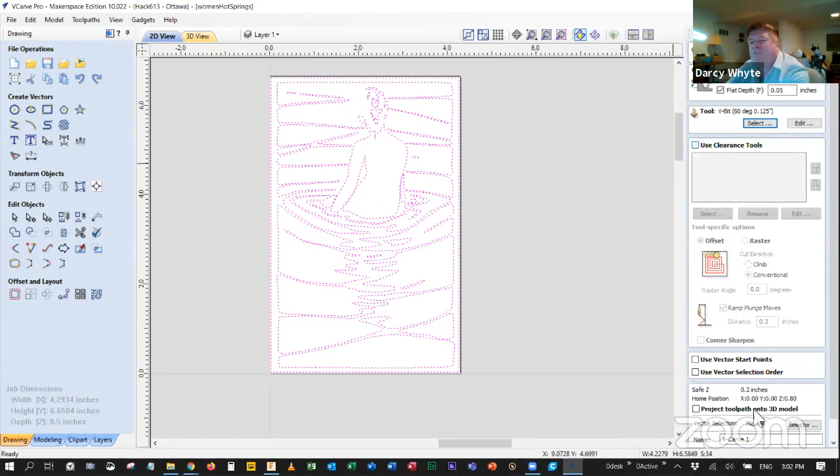So in this particular type of work, I already know what to do. You just select everything and you pick the V for V-carve. Now I happen to have a V bit that is 1/8 inch, so it's already been pre-selected. There's a tool library over here, keeping a library of all the tools that you keep on hand so that you can assign the tool to a job. And once that's done, I would just pick all the options here, and I'll just calculate that thing.

Continue, and there it is. There's the little V-carve, this is the path it's going to follow. So I can put this at an angle like that. And you can see that it's going to remove all the material.

What's that, Ray? What's the time on that? Oh, for the time, let's see, I'll go over this.

There's a time button right here. You hit this button and we are looking at 53 minutes. But this is assuming a certain feed rate, so you'll notice that in the V-carve there's an edit here. This is assuming I'm going at 40 inches a minute as a speed, and that'll be your own business what you put in there. Some machines can go faster than others. These little guys are pretty fast if you tune them up after you get them, just as fast as any of the other larger machines. You've seen 3D printers, they can whip around, right? Same thing.

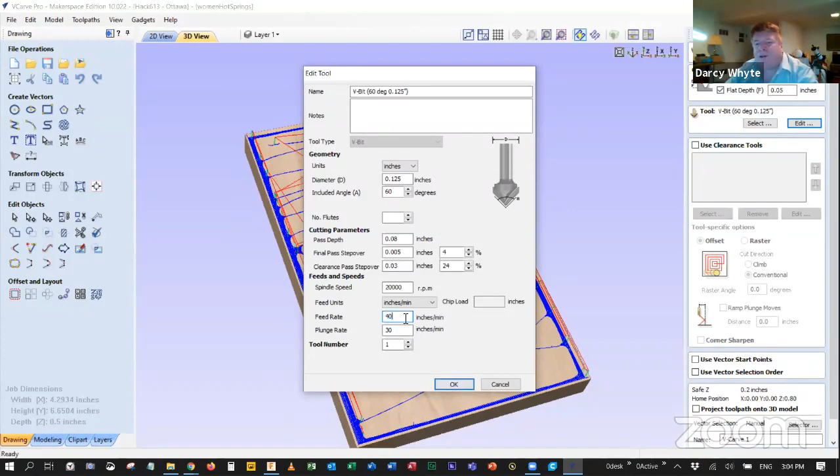And it's because it's the same technology as a 3D printer, so it's based on that. So you could put a bigger number there and say, oh, why don't we try 70 inches a minute, and then come back and calculate that again.

And then when I close and go find that button again, whoops, wrong button. I don't know what that does. So I'm going to hit escape and pray that it goes away. That worked. Yeah, now we're down to 31 minutes.

But if you're really in a rush to get things done, on the toolpath which I made here, there's an option where I can say use a bigger cutter to clear the big areas, and then use a fine cutter to get the fine areas. And the big cutter will take no time, because it's bigger. So use a clearance tool.

Select a tool for that, and you could pick a bigger, fatter tool, like a 1/8 or a 1/16, instead of the pointy V-shaped one. I'll pick, I think this is a 1/16 tool, the one that I picked, and I'll tell you why. I could pick a bigger one, it would be faster, but the tinier one doesn't kick up as much dust, so it just sits there and stays on the spot. And I got a cardboard box I can put around it as well, or you can put it on your back picnic table or what have you.

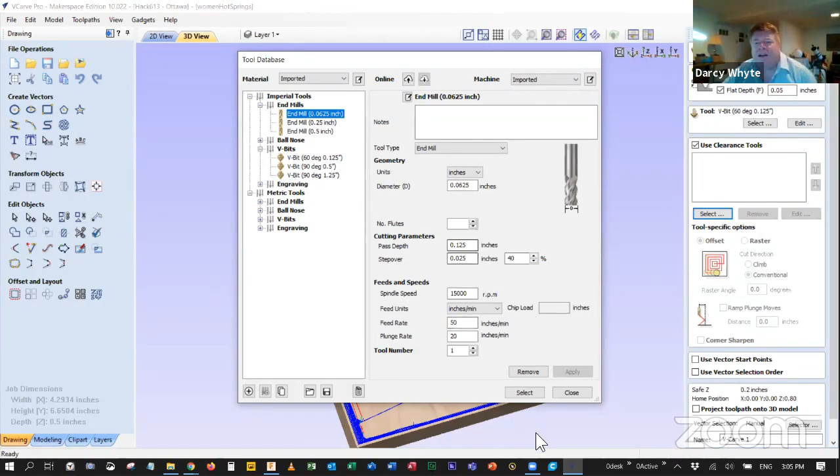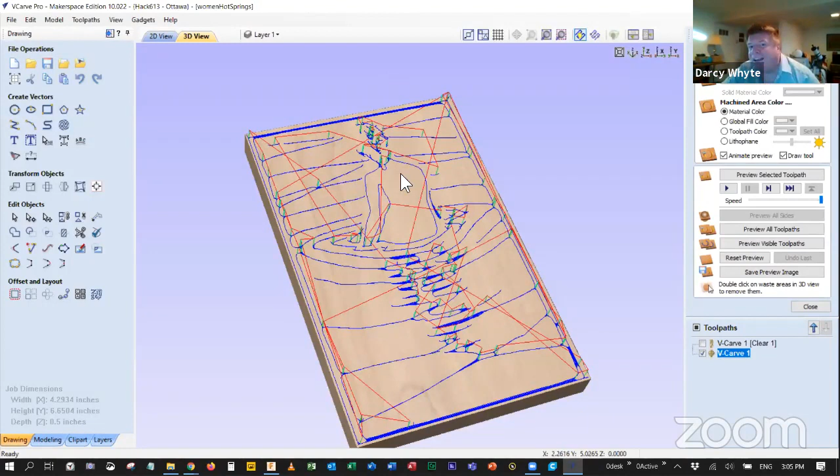But anyway, so from here you just select a tool for that, and then now when I calculate it, you'll notice we get 2 parts. So when I check and uncheck, this is the fine work now that will be done by the fine cutter, and it won't take very long, as you can tell by looking at it. Because before it was going to spend a half an hour going back and forth to do her back, but now the bigger cutter is being used for that.

And the bigger the cutter you pick for this part, the faster that part will run. So if you feel like changing your cutter in the middle of your job, you can, maybe that takes 1 minute if you get that mastered. Then what you could do is do that, and now you're down to about 15, 16 minutes from 30 minutes, you see? So that'll just be your own call you'll make when you do this type of work. Do you feel like changing a cutter, or do you just feel like walking away and having a tea while it's cutting?

So that's what your tool chain looks like. So once you get this done, you'll just save this file. It says something's wrong, I don't know why, but I'm just kind of going quickly, so I'll save that file. And now to run the actual machine, I'll get out of here and open up one of those files with Candle.

Now my Candle's sitting around under Active Art, then CNC Things, CNC 3018. This is the CD that it came with, and I think everything I need is in one of these folders. It must be download. Here it is, software, and then the Grbl client. So this is the actual Grbl client.

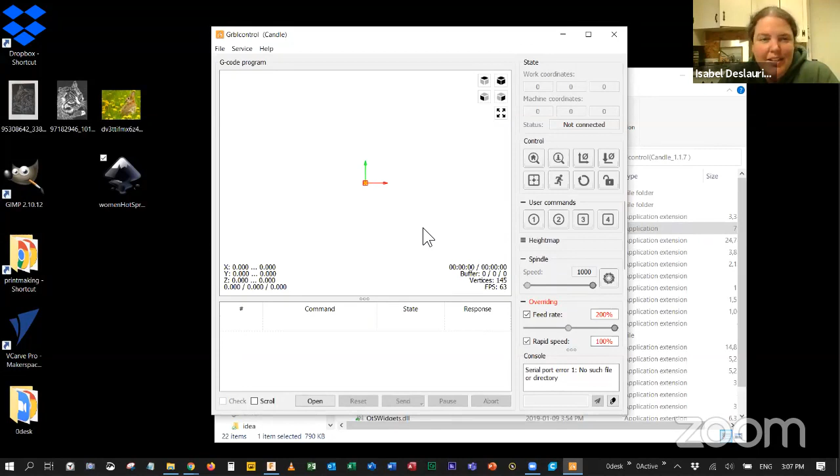And the VCarve Pro seems a little bit expensive maybe at first. So did you get it right away, or are there other options, I guess we can do what you do in VCarve Pro, we can do it in Fusion. Okay, so I think Fusion is going to cover this for us, but I've been doing this for a while, and I happen to be using VCarve Pro because it's pretty good.

Now, I'll tell you that it is expensive software, VCarve Pro, but here's what's happened. We're a makerspace, Hack613, so I managed to fill out the application and got us the privilege of being able to get VCarve Pro at a reduced price. Yeah, so I went out and bought it for our makerspace. Now, in terms of the way we run this whole show, what I encountered was no one wants to contribute.

So right now I've got the software, in theory, as a makerspace, but there's a couple of technicalities. This license is supposed to be in our makerspace, so I had a physical location on Bank Street, which is 299 Bank. I've since gotten rid of that because no one wants to contribute to that, or the software either. So that's kind of where it stands, I've got it, and I've got 5 seats for 5 CNCs at a maker's space.

So where I think we're going to wind up going with this is it'll probably continue that nobody wants to contribute, so I'll probably stop paying. I've been paying for this thing for a while now. And then we'll just use Fusion because it's already free and it'll do the same thing. So I happen to be using it because I got it.

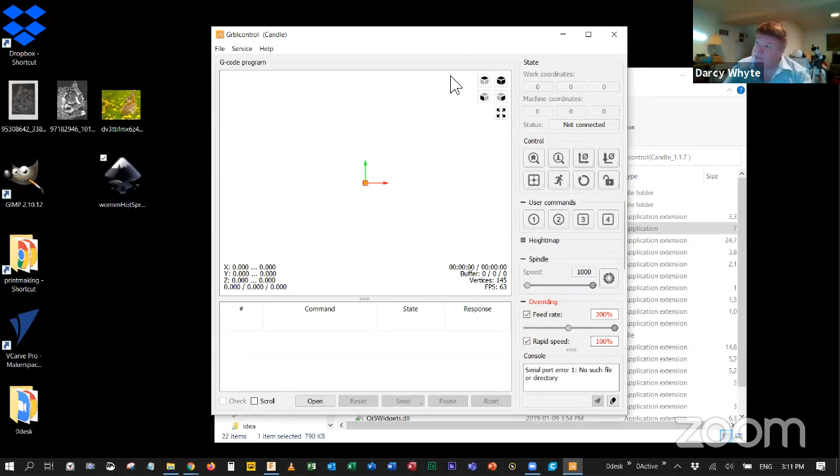And yeah, so you're right, it's expensive software and it's good software. But there's a ton of options out there on how you can get from your CAD to your CAM. In 3D printing, we call that process slicing, and in CNC we call it CAM.

Now another really, really nice tool chain is SketchUp. Most of us in our group are moving from SketchUp to Fusion, but I should mention you can learn SketchUp a lot faster—you could be up and going in no time. If I wanted to make something in SketchUp, watch how fast this is.

And all the CAD and the CAM is all built into a plugin inside there—it's really lovely. So I'll just look for my SketchUp icon if I can find it in here. I don't know my alphabet, so it always takes me a long while to find it. It's bottom right. It's red, next to the Google one. Oh, there it is, thank you very much. So we launched that.

So this is SketchUp Make, I believe, the Make edition, I think it's called. It's free. And SketchUp is $1,000, by the way, if you want the pro version. So we start using SketchUp.

And that's why I think this bulk buy is a good idea, because we'll all get a machine, we'll all build it together, and then we'll all do our first few jobs together and look at all these different software tool chains. Each person will have their own style of how they want to make things.

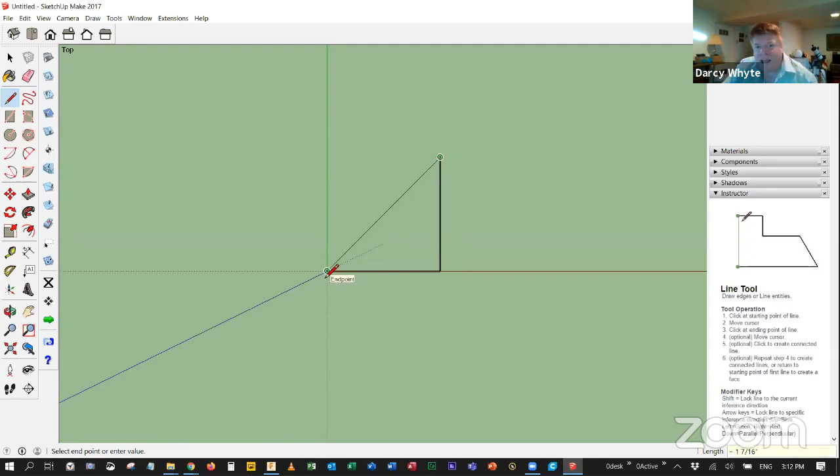So there's a guy there—I want to delete the guy. And then I hit the top of the house, so I'm looking down. Let's say I want to make a 1-inch square. I'll get down here with my pencil, start drawing a line across there, and type 1 inch. So that's now a 1-inch line I just made. Then I'll come here and type 1 again, and now that I've done that, I can snap to that corner and make my 1-inch square. Done. So then I get the move tool and shift it like that.

So then I go and use this plugin here—it's called SketchUcam, it's free, you just download it and add it to SketchUp, and it gives you CAM ability. So what I'm going to do is first go to the top button.

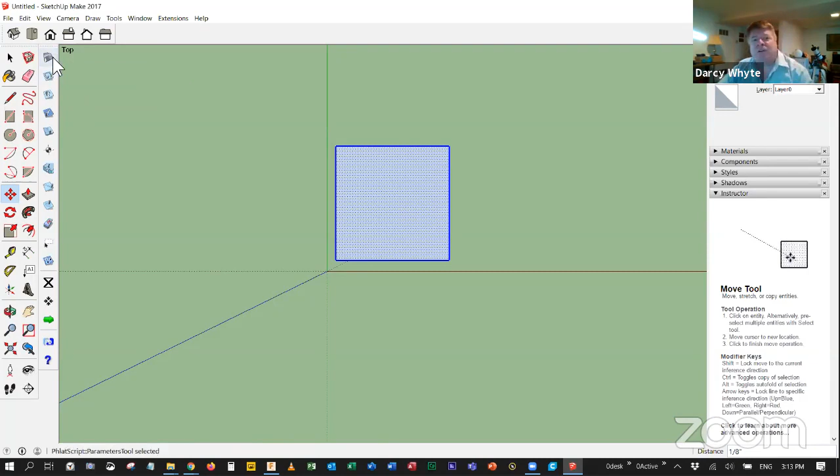And here I specify things like how thick my material is and which cutter I'm using. You just fill all this in. This is an overhead gantry and so on. Then you'll pick this outside cutter and say I want an outside cut on this.

That is, in fact, a finished product. And if I want to pop a hole in the middle, I'll get the whole circle, put that here, pick the next tool down, which is the inside cut, and hit that. That's an inside cut hole, and that's an outside cut on this outer part.

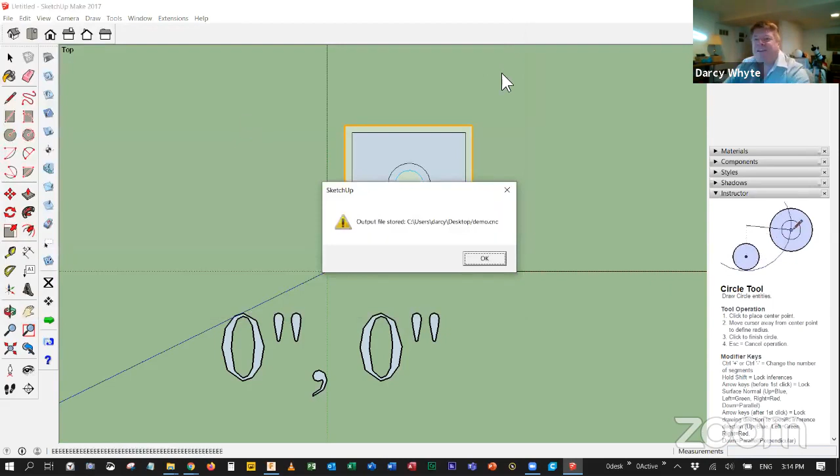And then from here, there's a green button. You hit this, and it creates a file called G-code out, and I'll just name it demo. That CNC file it just generated, I can now go into my...

...software called Candle, if I can find that. Here it is, Candle. This is the machine control. It's connected directly to your machine through USB. You'll go into service settings and pick the COM port it's connected to, since it's a physical plug-in to your USB.

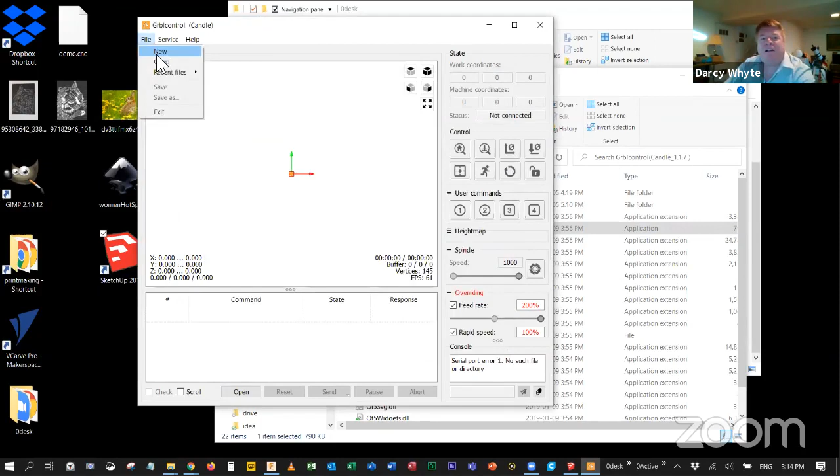But you'll simply do File, Open, and grab that file. Mine's on the desktop, and I'll select all files since it has a weird extension. And there it is. Once you've come this far, you just hit Go right there.

It's off right now because my machine isn't physically connected. I'll hit that button, the spindle will start up, and this part will appear before my eyes. So that's what the software tool chain can look like.

One of the reasons I'm interested in that size of CNC is to mill some PCB boards. Is that realistic? Absolutely. In fact, with this particular machine, Doug's more of an expert on PCBs and he's coaching me on how to make circuits. You can definitely make PCBs on these machines.

There's even a feature in here, I forgot where it is in the buttons, but I've tried it and it works beautifully. You click that feature, attach an alligator clip to the cutter, don't start the spindle, and the machine will go around and probe.

It'll make a map of the surface and then adjust the G-code, because when you're doing a PCB you want to cut the exact amount out, since you're often using a V-carve, so it's really sensitive to variations in the Z axis. Now, one option is to just use a square end mill.

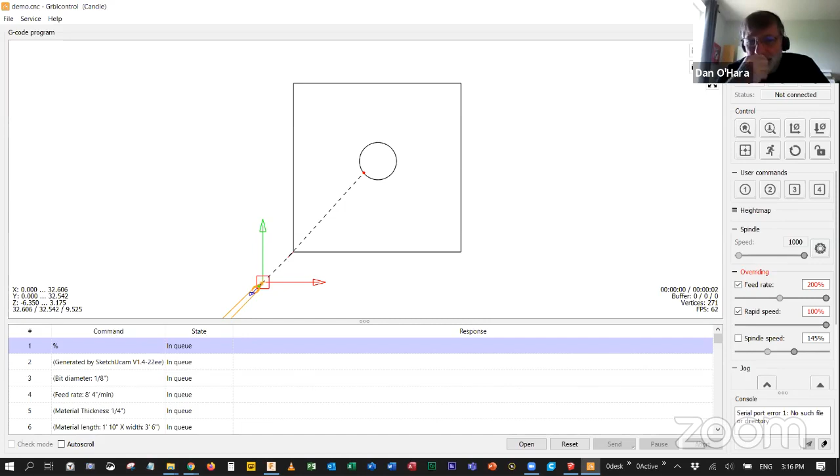So the idea with the alligator clip is you're conducting across the copper. Absolutely. On that controller I showed earlier, there are two pins labeled, though I had to research it since I don't fully remember. You just have ground and another pin, and you connect one to your PCB and the other to your cutter, and it'll go around and touch the PCB like that.

Okay, well, I'm in. I guess one thing, when I looked at these before, I quickly got lost because there are just so many of them. Yeah, I know. Do you think you'd be able to advise on that?

I'm kind of afraid to do that because someone might buy a bum machine. I know, when you buy something on eBay or anywhere, sometimes you have to return things. So what I'm trying to do here... is my screen still up? Yeah. I'll go back to that internet page and show you exactly what I would do if I were buying one right now. I've done this twice successfully already.

One of the machines arrived with a dead board, the little PCB board. So here's what I did. I called back the maker and said, look, the board's dead. He says, okay, I'll send you another one. And he did. Now, of course, they're slow, coming out of China. So I also went and bought another board right away, so I'd have a spare and get my machine up and running. It's just plug and play. I unscrewed the old board, put the new one on, plugged it all in, and it worked.

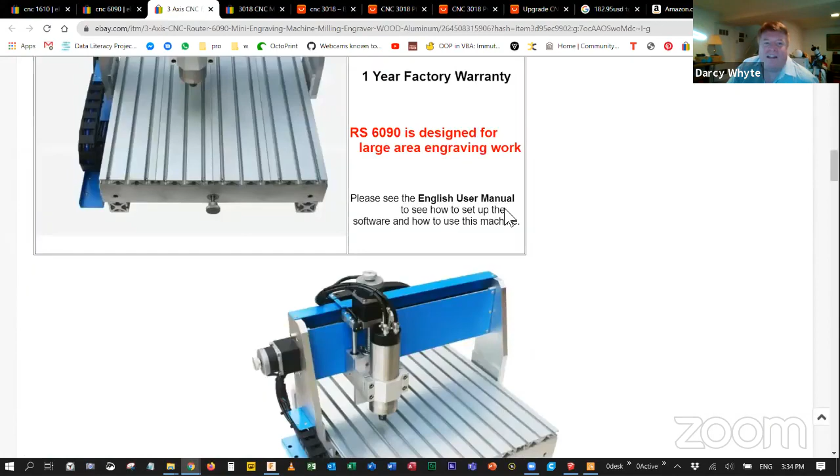So there's your entry level 6090, and I'll tell you what's wrong with it - the rails. In this picture, I already know it's misleading because of the price. They're showing supported rail at the bottom, but when you get this, it's not going to be that - they just grabbed some other pictures. It's going to come with round rail everywhere, not as stable as supported rail. I'm pretty sure of that. And the picture doesn't even look like a 6090, that's not even a 6090 they're showing. So this is a bogus listing of some kind. They got 100%, I don't know what's going on, but it scares the hell out of me.

6090, maybe it is. Oh, there it is in Canadian. But when I clicked it, it was only - okay, that's US, and then that's your Canadian. So you're looking at 3,500 minimum, 3,700 entry level for this machine. But you're starting to get some higher options.

You got this space - here's what you're looking at. You're trying to get over 10 centimeters finally. When you get to this size of machine, you're going to get 10 centimeters, even 20 centimeters if you get a nice one. I've seen these machines like this one, you're going up in price - another cheap one, that's a little over the budget there. Yeah, that's getting crazy. But they're sweetheart machines, these.

But here's the problem with buying a 6090: they're heavy. Unless you buy a cheap one - if you buy a cheap one, it'll go DHL. But if you buy one of these that's not cheap, it won't go DHL, it's over DHL's limit. That means if you buy it, DHL won't touch it and Canada Post won't touch it. They're going to ship it to the nearest port, and you'll have to do logistics from the port - you're going to pay fees for all that.

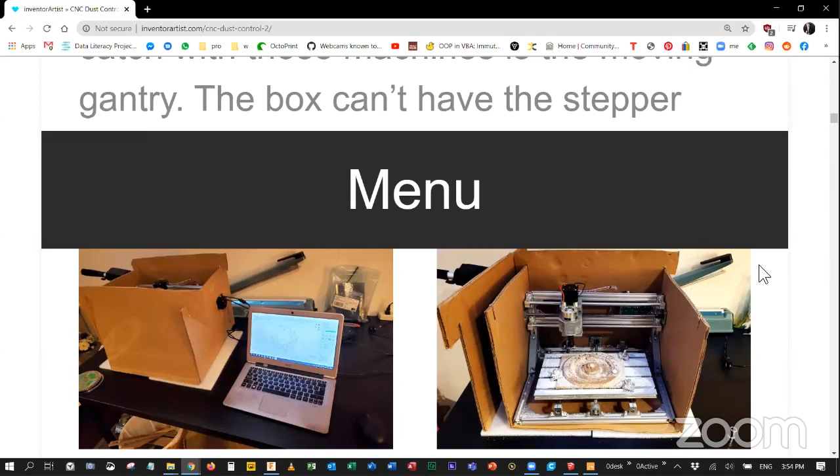Sign out, okay, right, see you later then, Duncan. Yeah, see you, bye - whoops, I was trying to click the X on your screen. People keep trying to mouse onto your screen. Oh, I was trying to use the X on your screen. Yeah, I just took it away so it wouldn't be so confusing.

So these are real concerns, but I found that the value of these machines is so high, I'm ready to take on all that stuff.

Out in my West End, you know how I deal with dust? The CNC machine's got a dedicated room and I close the door. Oh, okay, well that works too. Yeah, I go in there once in a while and shovel the dust off the floor. Really, that much of it? Yeah, I've had to shovel it, that's how bad. Because that's a lot to empty and vacuum. I just say let it lie where it lies, and you just pick it up. Yeah, exactly, and that works perfectly.

Yeah, I definitely want one. I just have no money. I can lend you money, I'll lend you money - you want to buy stuff? No, down that road leads danger - lending with high interest and remote access. You wake up in the middle of the night, you'll be making earrings.